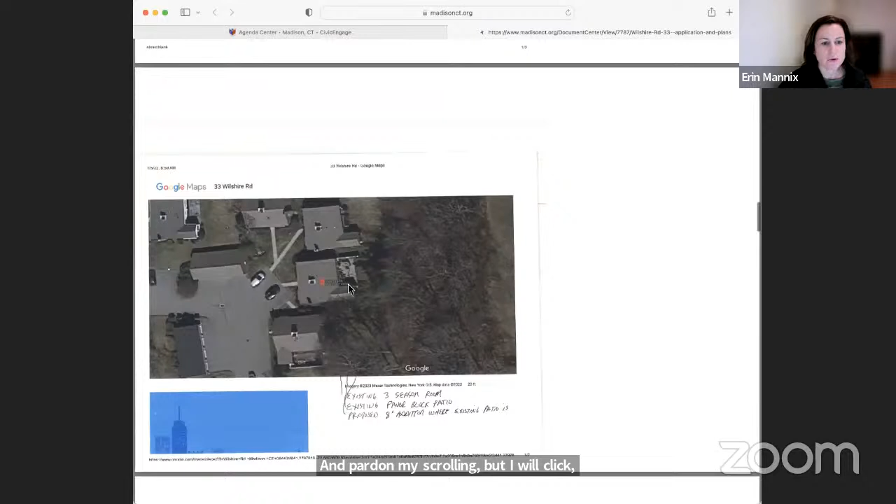This is number 33, which is at the end of the cul-de-sac. The existing rear of the building looks as such, and this is the subject space that's going to be expanded here over the existing patio. Here's the Google Maps that shows the expanded patio area and the existing 3-season room, and this is the addition that will come off the back. It'll be the same materials, same style windows, and that's pretty much it. No visible changes from the front elevation as it's located fully in the back of the property.

This also does require Inland Wetlands approval because it's a regulated activity adjacent to wetlands out in the back, so he's got to go before both agencies here. Any questions? This is kind of a no-brainer, I think. I don't have any questions. Does anybody else? No.

Matt, I'll make a motion to approve as presented. I second that. Any discussion? No. All in favor? Aye.

Okay, wonderful, Mike, that was easy and painless for you. Thank you very much. I'll hopefully talk to you tomorrow. And then hopefully as we update any zoning regulations, maybe we can come up with some language to avoid this process so they don't have to, especially for a rear addition, jump through hoops here for approval.

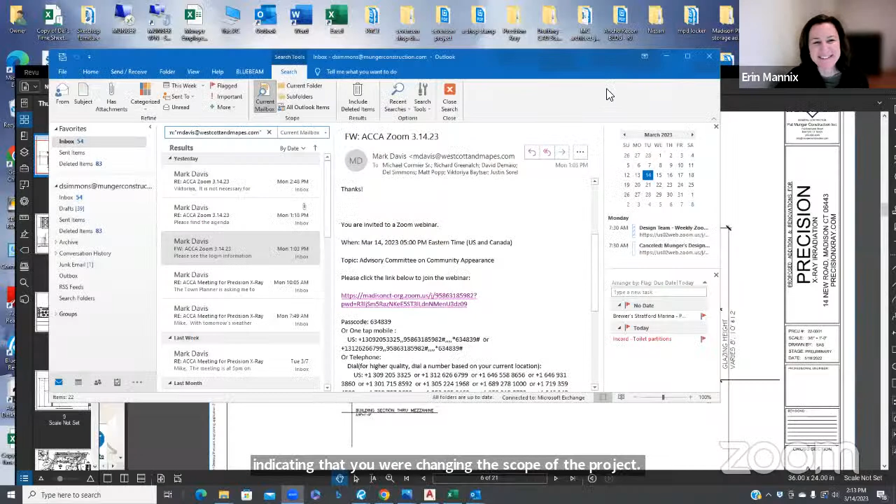So if you can give me the screen, Erin. You should have permission. Okay, good. And Del, I understand I received a voicemail from you indicating that you were changing the scope of the project. Somewhat, yes. Okay, so we're all seeing this for the first time. Okay, well let me get rid of this.

Okay, here we are. So as Mark said, we have a new technology building here that we're working on, where we've got the addition to the existing Garrity building. It's around a 4,000 square foot addition. The original plan was going to be a 2-story addition, as it's shown here. However, due to budget requirements, we knocked this whole upper section off, and we're going to go to a 1-story building. Can you mute us?

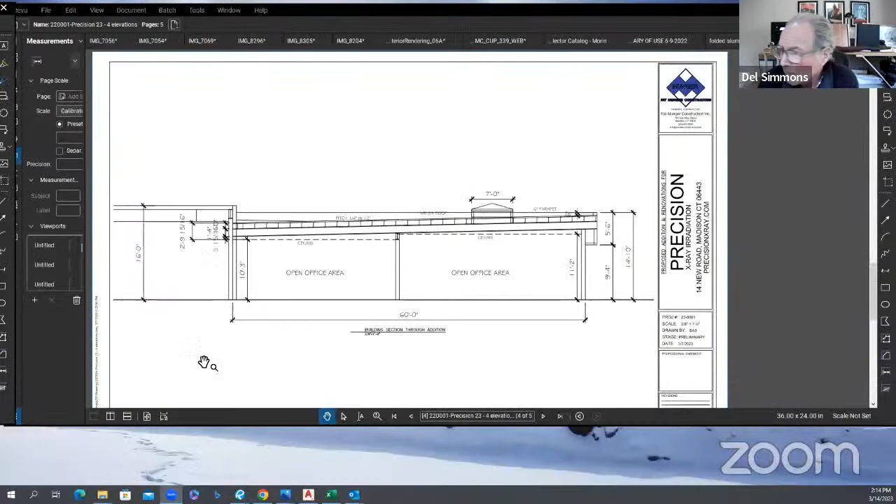So what I want to do is I want to share my other screen. And this is the new... There you are. So this is our new 1-story cross section. To bring you up to speed, this is what the building looks like right now. The front entrance, this is the north elevation.

As we walk around, this is an addition that was built by Munger Construction in 1998. We continue to walk around the building. This is the east side of the building. And you can see here that it really looks like an industrial building. So what we want to do is really upgrade this image. Here's the rear side again. And going around back to the west side, here we are.

So if you peek through the trees, New Road, as you know, as you head down New Road, there's quite a tree barrier between the road and the building. If you peek through, this is what you see. Here's the existing entry. Down here is the existing Munger addition, built in 1998. And then this is the additional piece of office building that's in the front. In the background, you can see the 2-story storage area.

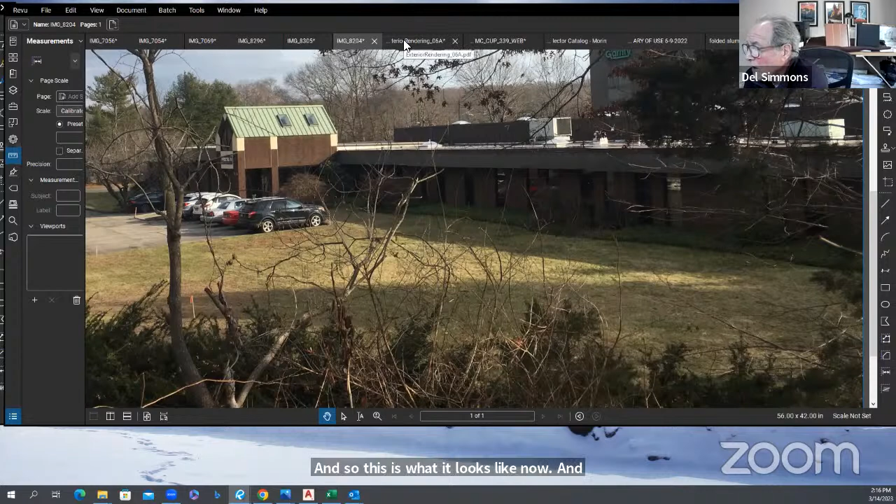And so this is what it looks like now, and this is what we want. This is the rendering of what it will look like. And what I want to say is everything that I marched around the back side, including this 2-story area here, is all going to receive new siding. So when this building is completed, every elevation will have new material, and there will be basically 3 materials, all coming from Morin Corporation out in Bristol, Connecticut.

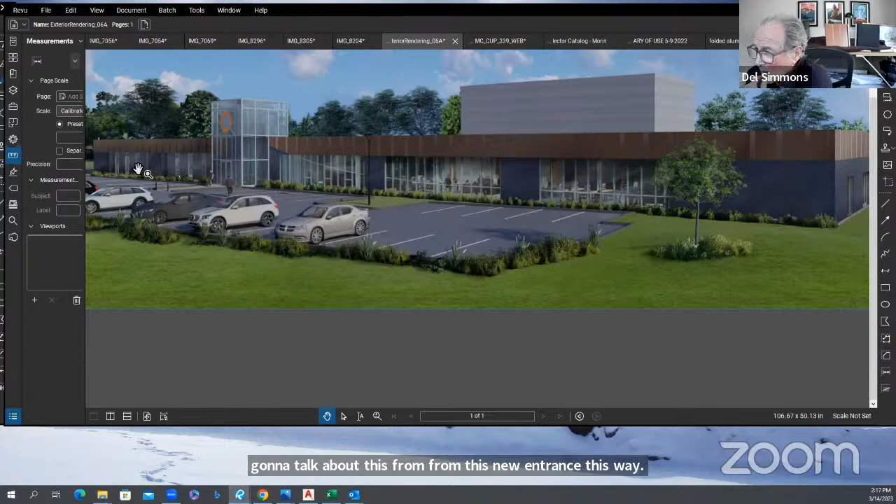And there are 3 types of siding. Now, from this new entrance this way, this is all an existing masonry building right now, brick, that's going to receive new siding. The existing windows are going to remain. The upper area, this soffit here, will replace the existing soffit that's there. And then that level will carry all the way across to the west end of the building.

Now, there are again 3 materials. One is a vertical metal siding. It's a rib, it's a 12-inch metal siding, and it looks like this.

You can see the rib shining there in the reflection. That's this area up and back, as well as this area over here on the side, around the existing building.

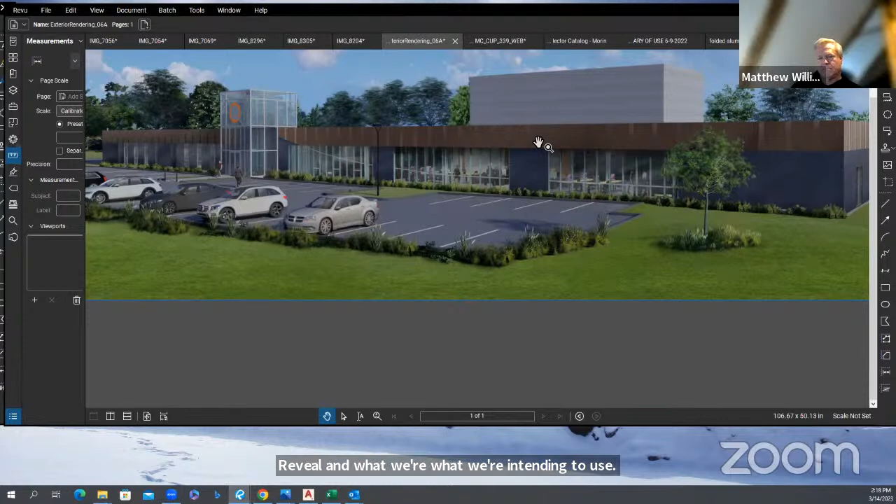Now, this material up here on the top is going to be a Bristol black. However, it changes from a 12-inch wide to an 8-inch wide with a 2-inch reveal. We intend to use two types of black called Bristol black, with a gloss and a matte finish. If I zoom in here, this is the matte, and this will be gloss, matte gloss.

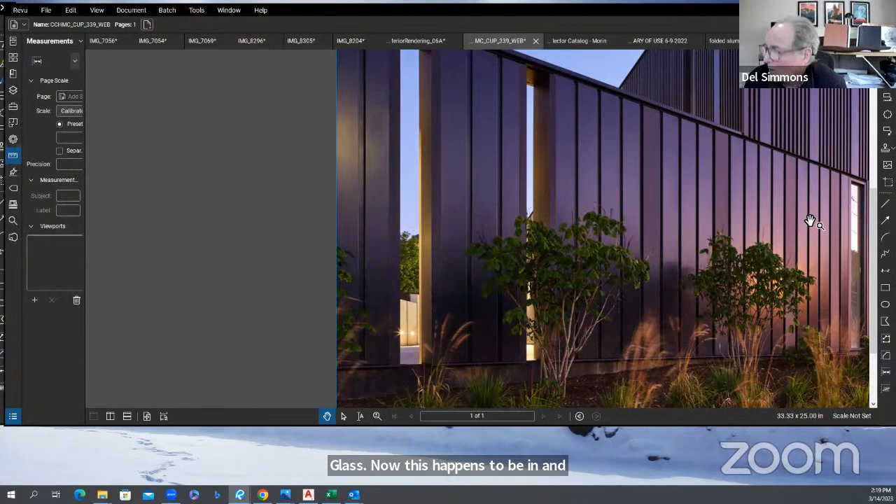Now I'll show you a photograph of a blow up of that same material, from an existing building that has it. You can see, here is the matte, here's the gloss, matte, gloss. This happens to be in an afternoon western exposure sunset, so it's got a bit of a glow to it. Our renderer also captured that same glow to show that it is in fact two tones of black, one gloss and one matte.

So that's that material. And this material right here, as you can see, is a horizontal panel. That horizontal panel is going to be made of an aluminum product, and there it is right there. It's a panel that has the edges bent back, a folded plate that has about an 1/8 of an inch gap between it and the next panel.

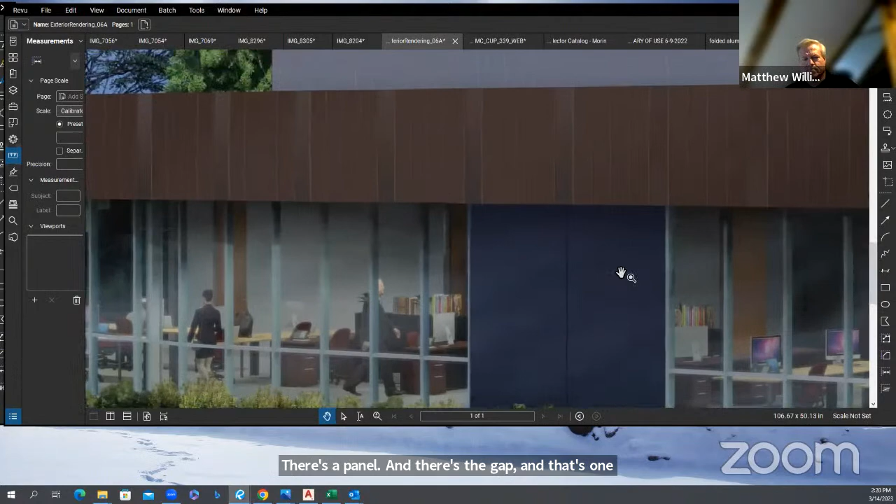So there you can see it. There's your gap, there's the panel, and there's the gap. That's one section, and that would be another section right there. So we have this one material, this material, and this material. Those are the three materials.

Now let's go to the colors we're talking about for the production area around the building. We all know that if you take a picture of a colored shot, everybody in this presentation probably sees a different color because your video cards are different. So we will be delivering panel materials to you, as well as a colored rendering. We can deliver it tomorrow so you can see the actual samples.

The samples are going to be, this is the Bristol black that's going to be in the matte and the gloss. I'll go back to the rendering again, that's this color. This color right here is called the dark bronze, and that is this color right here. And then the third color is the zinc gray. Going back to my rendering again, that's this color right here, and this color up here.

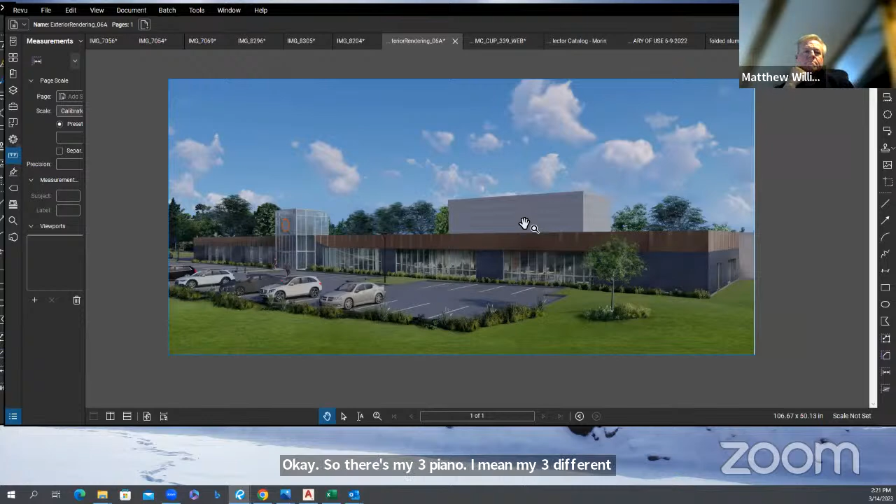Okay, so there's my three different materials. The soffit is aluminum. The gray, the zinc gray, is a galvalume. And these pieces right here are aluminum. And then they all have a finish, a painted finish.

So we did the colors, and now these are the actual panels. This is the MX6, this one that I held up here. This is going to be at the production area. This is the wrong color, this is not, this is going to be the gray. And the color that you're seeing on your screen is also the wrong color.

This is the right color. Jeremy Blackshear. I'm a popular guy today.

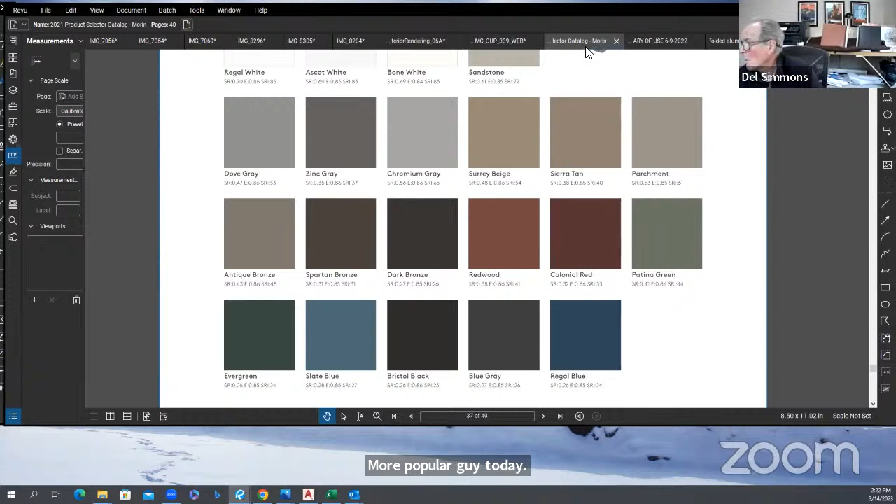Okay, so let's see, we've got our colors, we've got our panels. This one right here is the MX6 for the rear of the building. This is the soffit, which is an MX8, and it's a 10-inch with a 2-inch reveal. And then this one right here is the one that's folded. This MX6 is also one that is used, this aluminum, it will be folded to create this panel right here.

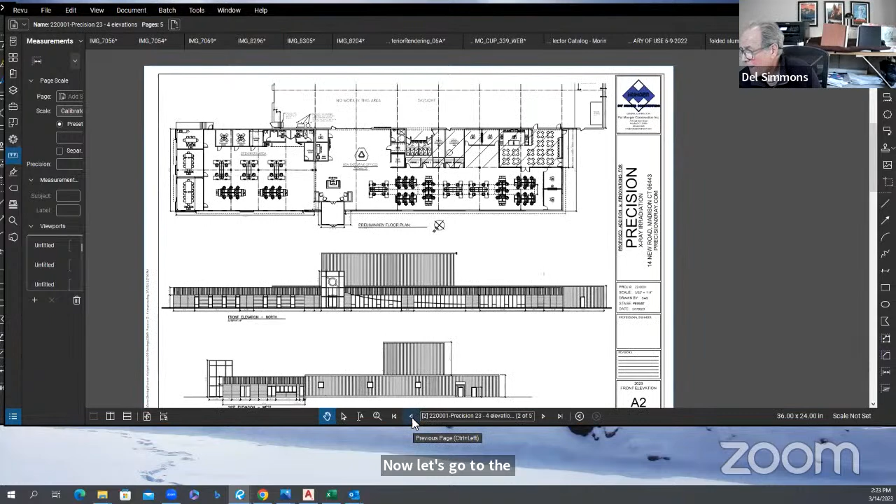Now, let's go to the elevations. So here we are, this is a one-story building. This is the existing Munger building that will be renovated, fully renovated, with the exception—well, it'll be gutted, and the windows will be kept. It will be new siding, and we'll have a new soffit all the way across. This one story right here shows the open office floor area.

This is an existing portion of the building that will remain. There's a new cafe here, and these are offices and offices. This is the large production area behind, which is not a part of the project except for siding. And this is the elevation that you saw there.

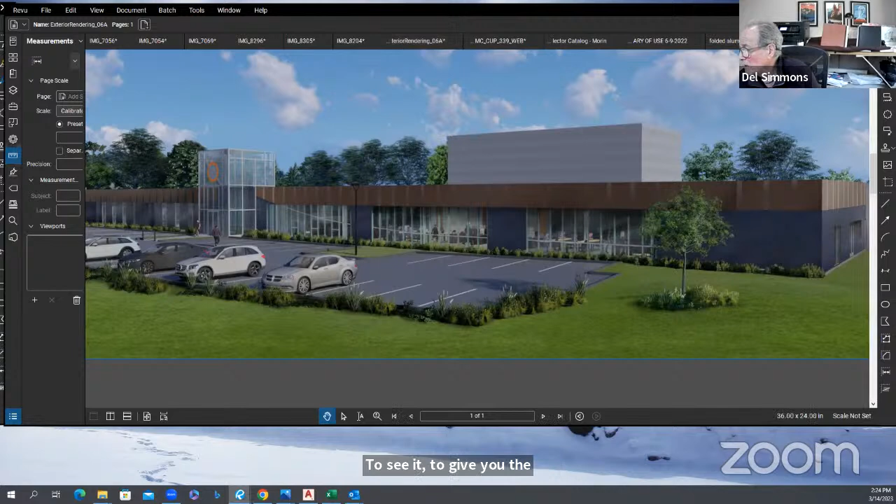So let's take a look here to give you the benefit of the rendering, which really tells it all, and gives you the closest approximation to the actual building. So there's our elevation. This is the west side. This is all the new siding that we talked about. This is all going to be glass, by the way—the entrance is all going to be glass. And this shows the west side, where that cafe is.

This is the east side. This is the back side. All these loading dock doors will be replaced.

This whole area has new siding. This is the south side of the existing building. And this is the rear of the existing Munger construction building, which will have new siding as well.

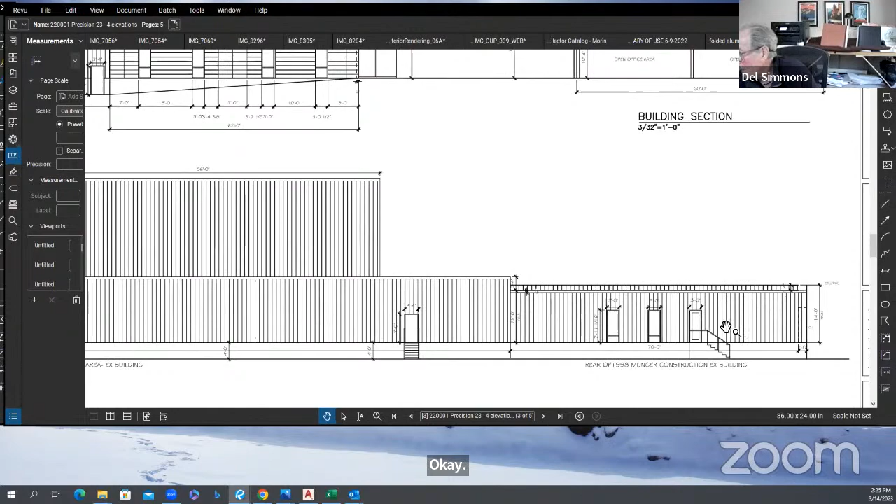And this is the west side, the east side of the one-story building, the one-story existing Munger building.

So, as far as appearance goes, those are the components. Let's go back here, bring it to this point, and then I can answer questions that you may have.

So Del, can you hear me? Yes. I have a question.

The colors that you showed are primarily gray and black. Is that the way you perceive it? They are.

Let's go back to them, Ron, and look at them together. Our colors - you will have a sample of this. This is a dark bronze. So this is a gray, and this is black. So you have black, gray, and dark bronze.

So the bronze, I guess my question is, do you feel that there's enough contrast between the bronze and the black?

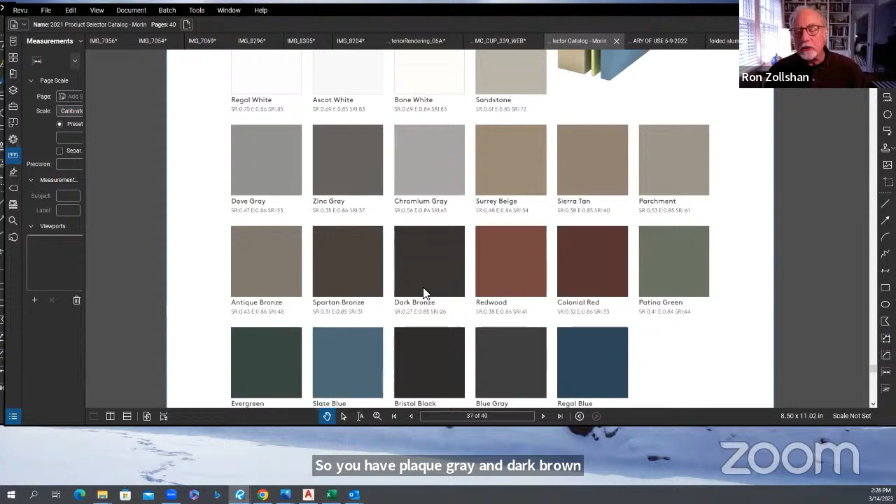Let's have a look here. And there it is, really. That's a bad example, isn't it? I think, Ron, when you have the actual samples in your hand, you'll see that there's a better contrast than what you have. Okay, great.

Yeah, and you will have those tomorrow in your hand. It's really hard for me to do that because... okay, yeah, I guess on the screen it's hard to tell.

So Del, I have a question. Sure. Hi, by the way. Hi. You can't see me - my computer won't allow me to visit by image, so I'm here anyway. Good to hear you, Peter.

Okay, so I'm looking at Google Earth, and I can see the black roof, which is the main manufacturer. There's the thing poking forward that's going to be glass, and to the east is that '98 addition. To the west, there are three pieces of white that don't go all the way to the edge of the building. Is that something that's going to be torn down?

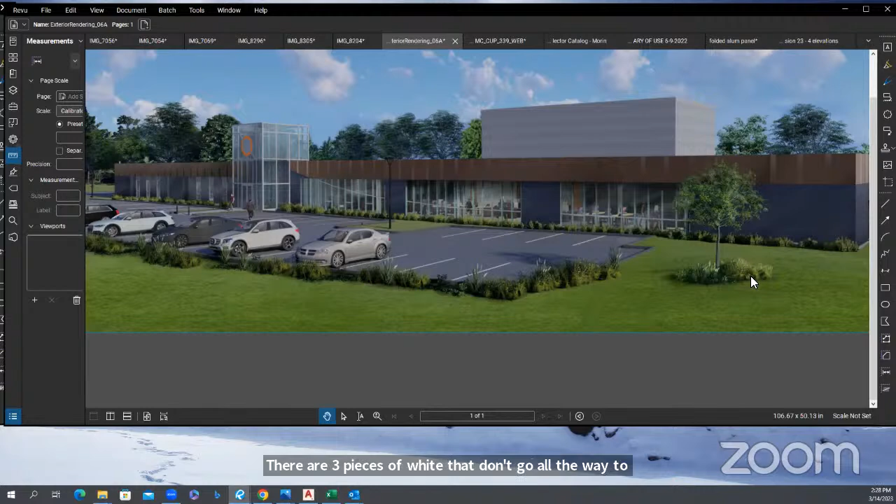I'm not sure exactly what you're looking at. Right now, if I go back to this, this building is being expanded. Yeah, the building is being expanded, from here to here.

Let's see, if I go to the floor plan, I could probably show it the best. Yeah, I was looking at it earlier, but I can't look at it at the same time. Let me go back to the floor plan and we'll go over it. That would help. Yep, hang on.

Yeah, here. So if I put a highlighter on this, from here across here like this and to about here - this whole area in here is really the limit of the addition.

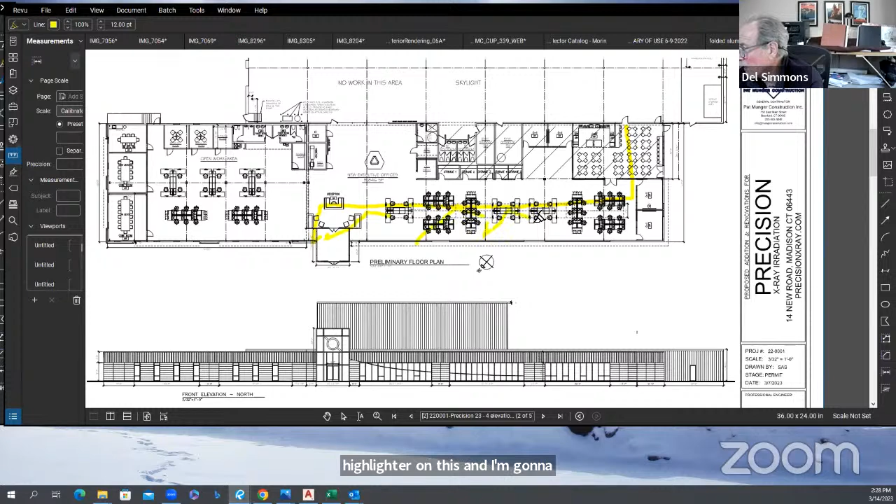Okay, so I think you were referencing something over here on this end. Well, there is something on the ground, a square thing, I don't know what it is, to the right of your drawing. So all I needed to know is the addition is going to stop short and the old building runs past and then moves south.

Yeah, you know what I can do - the drawings, let me switch over to this other screen again. Here. Yeah, there. Come on, there we go.

If I can just jump in for a minute, Peter, I have the same question, and I think it comes down to - it looks like the new fascia getting that Bristol black panel is all in one plane because the addition comes out and basically creates one front plane of the building. Is that accurate?

Yeah, now can you see the north facade there? Yeah. I don't see the entrance canopy. The glass canopy is not showing. Is that just that little bump at the east end? Have you got the site plan up on your screen?

Okay, yeah, I can see yours. I've got yours up there. Now I get it, it shows it. All those bumps go away.

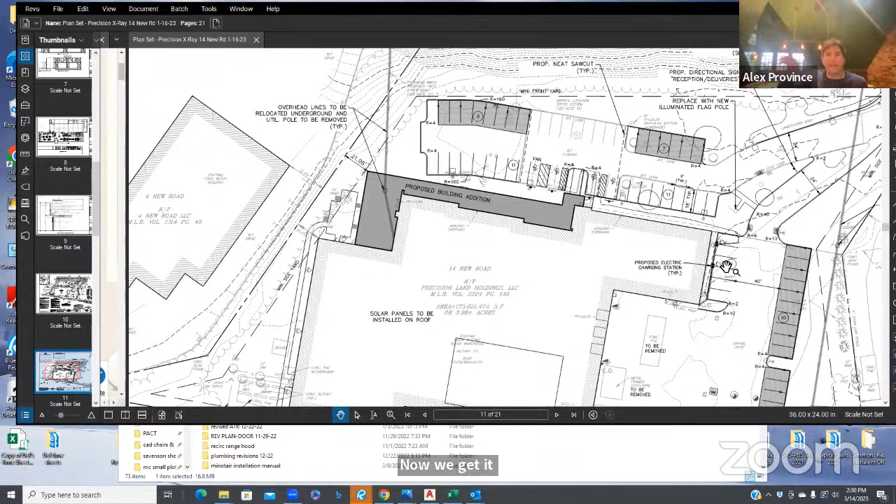This front piece projects across to here like that. Now it looks like the rendering. But the rest of the building still gets sided to match the proposed new addition, correct?

Yes, it does, Alex. And does the sign that would face the railroad track, is that still included? As of this point, yes.

Thank you. Matt, so if I can ask a question, you had said that there existing windows, but it looks like you're going to have new storefront to the right of that new entry and perhaps old storefront or windows to the left. And my second question is, what is the color of the windows?

It's clear, Matt. Clear anodized? That's what the rendering kind of depicts, a clear anodized look. Yes, it would be clear anodized.

Matt, John Cunningham, can I ask you a question? Does anyone else think the main entranceway is a tad bit out of scale, or is it just me? It looks like it's a little bit too big.

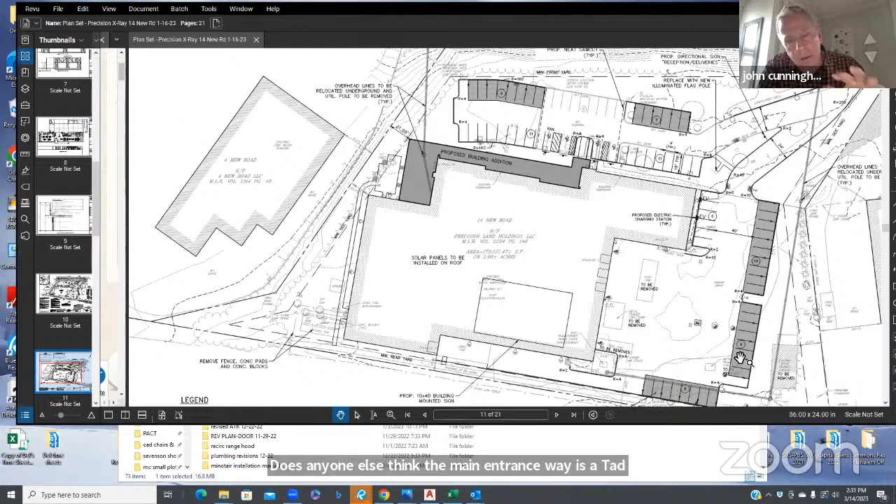I'd have to look at the elevation again, I can't tell from the plan. Let me go back to the other screen so you can have a look. Not that it's a big deal, I just wonder what everyone else thought of the entranceway.

Do you want to know what I think, John? Yeah. I think it fits, I think it works.

But here, let's have a look at the rendering because that gives you a little bit more scale on it. So none of that is existing now, right?

Well, look, there's a bump, here's the existing building. Yeah, that thing is still there, but not as big as that. That kind of leads the way to this form. Square this form off, and you're quite similar in size actually to that.

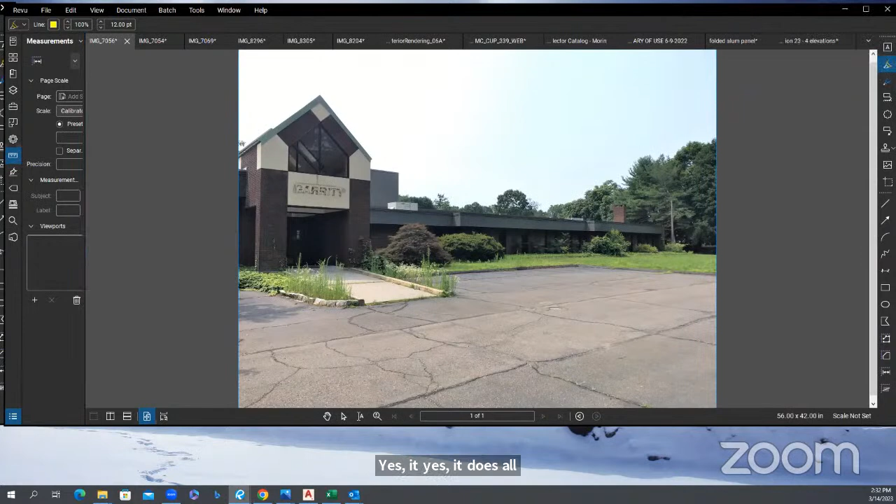Does it grow toward us though in the picture? Does the tower get bigger? Yes, it does. Wait a second, let me have you look at this site plan here.

The building actually projects forward. See how this thing is all hollow here? This whole section is the new building, it will come right to this plane right here, Peter.

Right there. And then the glass comes toward the camera? No, that's the face of it. That's the face limit. Let's go back to here. That would be this face right here.

Okay, so that's all new. Yeah, this is all new. Is it from here? Here is existing, with new soffit and new material siding, and existing windows.

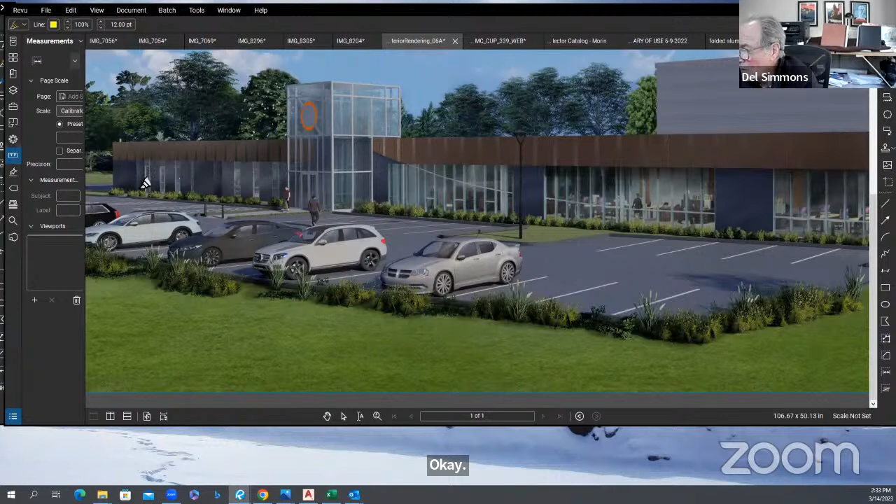And then over here, from here forward, this is all new in the front, all new in the front. And a lot of this existing building will be demoed as well. It's not keeping the existing material.

It keeps, there is one portion. Let me go back, here we are. This portion right in here, I'm going to change color so you can see what this is. This section right in here, see it says existing sprinkler room?

This is existing, because that's my sprinkler room, we're not tearing that out. And this is a series of existing restrooms.

So this area, with the exception of this area from here this way, this will be all demoed inside, with the exception of this. So we'll obviously have to keep roof over this, keep this all up and running while we do the demo out here. This is our joint right here.

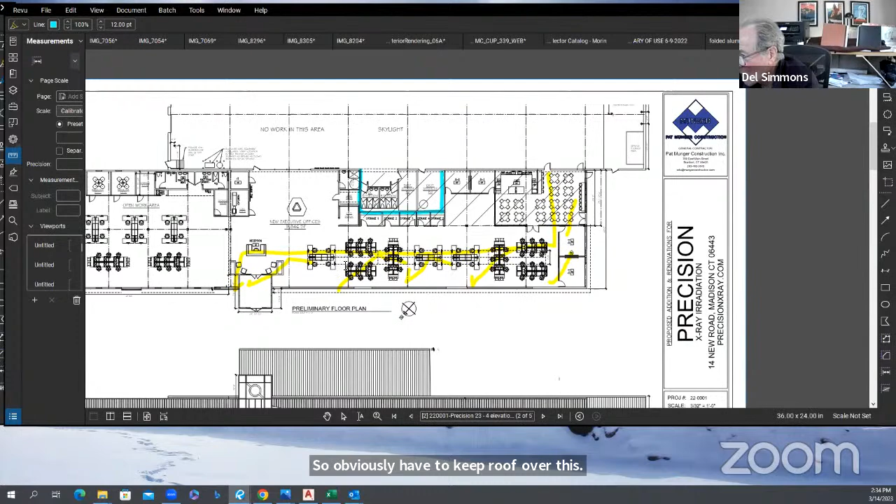That right there. Whoops, oh well. Trying to get fancy.

Yeah, so this is the line. This is the demarcation of the two.

Let's go back here again, give you the overall view. So it's a whole new building, and the front is filled in as if it were filled in from the old building. That whole section on the right is new.

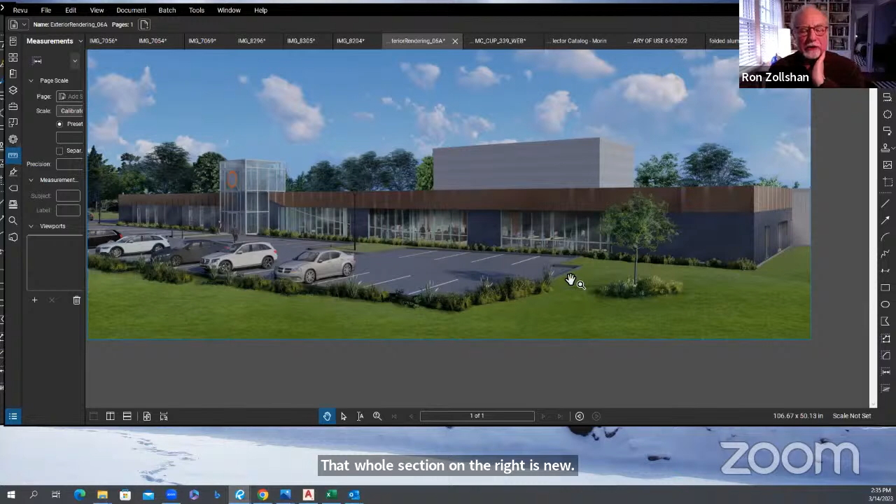Ron, what we wanted to do is we wanted to get this plane and extend it through, and then square it off. Right, yeah. You're not just gutting the inside of that building to the right, you're tearing it down except for the restrooms and the sprinkler room.

Exactly, yep, you got it. And building a new building to fit the plane of the building on the left.

Exactly, and also to give it that new look. We really want to do this because the other building is so industrial and so aged that we were looking for a complete new look.

The product they make, these x-rays, this is going to be a place where these x-rays are displayed. If I go back to my floor plan, this whole area right here is a kiosk, and this is where x-rays will be displayed. This whole area opens up with a glass wall into the production area, to try to make that relationship between the interior and this new space. It's going to be like an open showroom, like an automobile showroom, but except for x-rays.

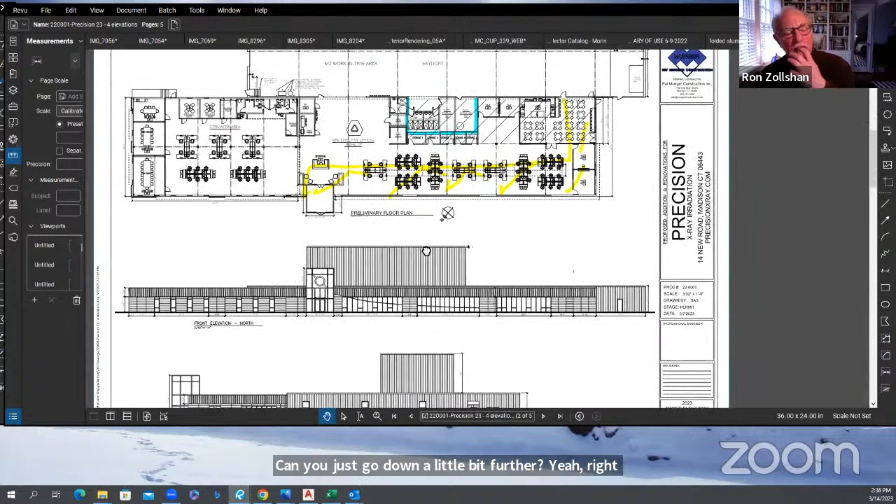To John Cunningham's question, can you go down a little bit further? So the existing entryway, is it larger or smaller than the new one in depth? In depth, from front to back, it's the same plane. From here to the back, this point to the back, is the same.

This is where it starts. That's where the old one started too. Exactly. Now if you want me to, let me switch and I can show you that. Let me switch over. This is an important point, I think, for us all to see.

Share screen. Share. There. Now, can you see this here?

Just to piggyback on what Ron just asked a few moments ago. Are you sure the Bristol black isn't the bronze, and the bronze the Bristol black? Was that a word switch, or are we looking at Bristol black and it's just reading as red?

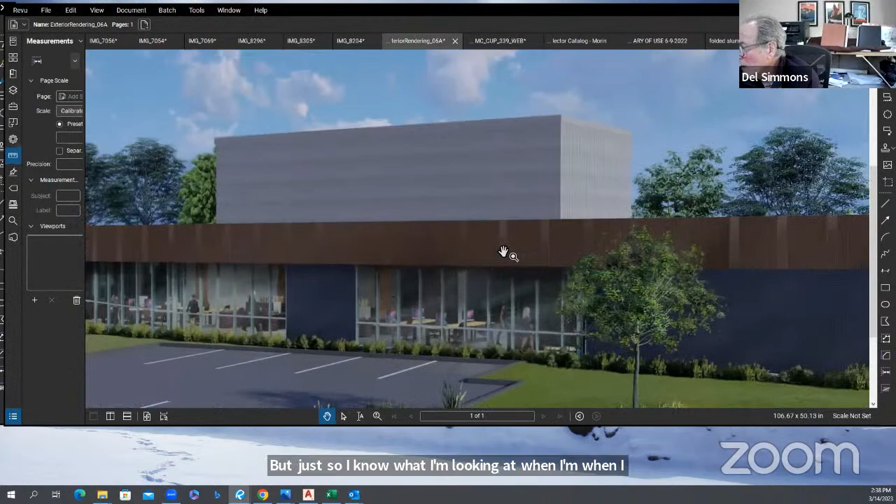If you look at this, this is the Bristol black. However, the reason we chose this Bristol black is that it becomes, let's call it a chameleon in the sunlight. It's highly reflective, and there you can see it picks up the afternoon sunlight. Look at it across there.

So again, you will have these things delivered to you. You can have a look at the actual color.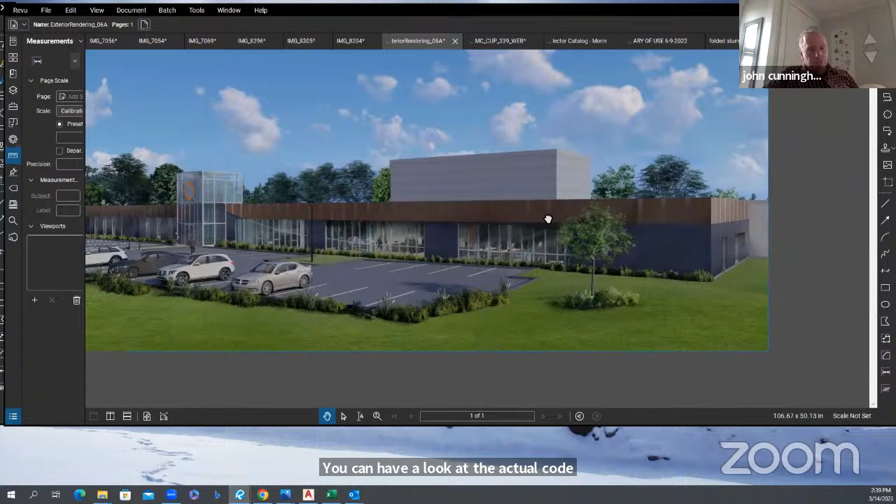Yeah, so let's go back to those again, Peter. So if you could label the samples, that would be useful. The actual samples do have exactly that on them. They do, yep.

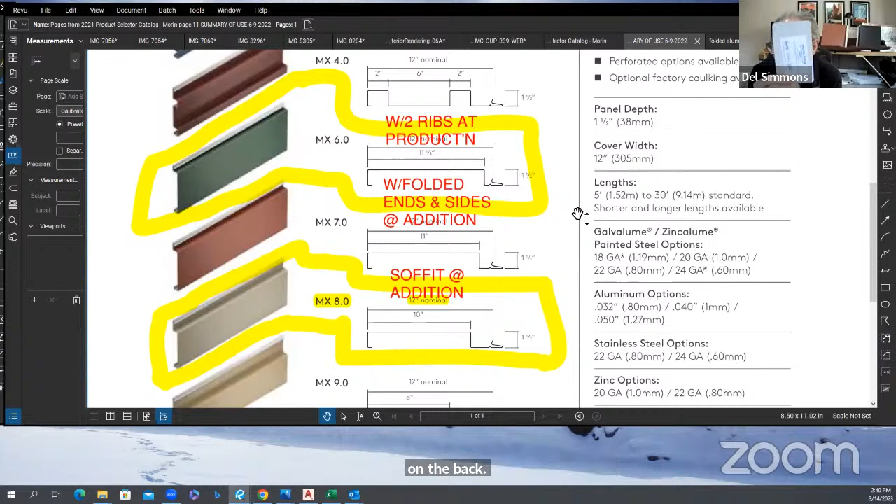There are some samples that are 4 inches by 5 inches. This typical type of sample, like I'm holding up here, has the color and has the label on the back. That's what you're going to be getting. Two for the black, one you will see is reflective, one is matte, and then you'll get the zinc gray and the dark bronze. Both of those are labeled as well.

Mr. Chair, do they come back for lighting and signage at a later date?

If there are modifications, I think Aaron could answer that better than I could. But before we go on to anything else, I have a couple of questions. Can you go back to that site or floor plan? Can you give us the dimensions and plan of that new entry structure?

Sure. So how wide is it? Roughly 17 feet that way, and 17 feet that way. It's a square. And how tall is it? The height is 26 foot 9 inches.

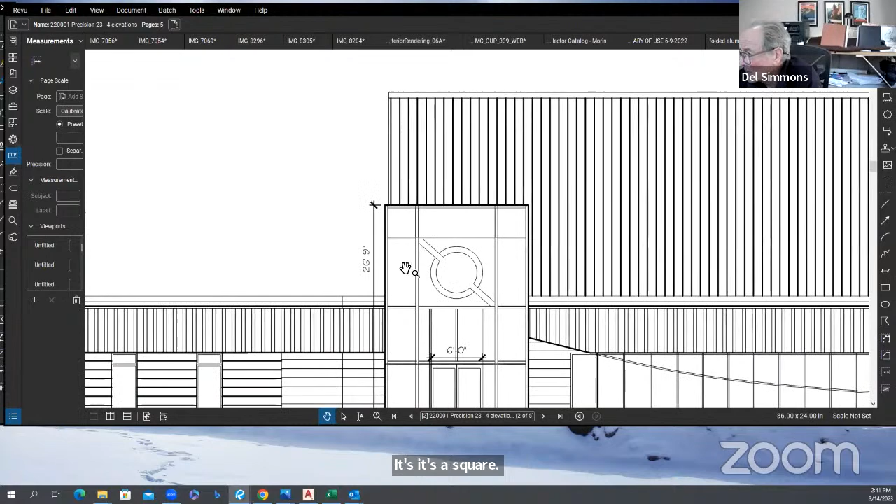Okay, and in your rendering, the part above the flat roof looks translucent, transparent, like you can see through it. Is that the way you intend to do that? That's accurate, yes. Will there be lighting in there?

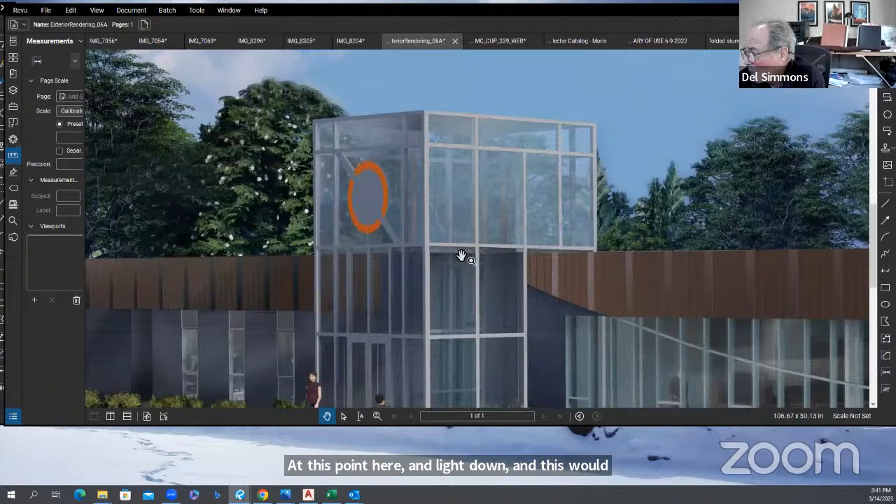Yes, there will. It's not 100% resolved, but we were planning on putting a light level at this point, with light down and up. This would be illuminated at night, but we'll have a ceiling height at this point, so it's not one volume up and over top. It will be separated.

That seems to me like an important element. Yeah, it is a very important element. That's the branding of the facility. I think because that interior lighting is part of your exterior projection of the building, you probably need to give us some specifics. I'm sure planning and zoning will want to know what that light level is and when it'll be on, so that's a question you should anticipate.

So to get back to John's question about proportion of that structure, I don't think that it's a concern, since it's a large building set back far from the street. If you go back and look at the elevation, it's kind of a minor feature of this very long facade. So I don't think it's a huge deal.

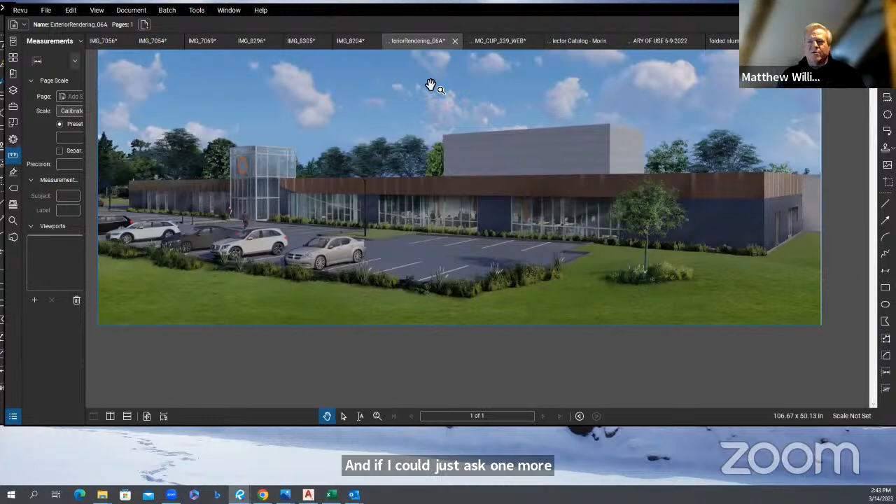If I could ask one more question, can you go back to that site plan for a minute, where it showed the original structure versus the new structure? That gives us some relation, and a look at the relationship. This is actually longer than what we'll have, but if you flip back and forth between these two, and go to that site plan, I just want to look at that footprint for a second.

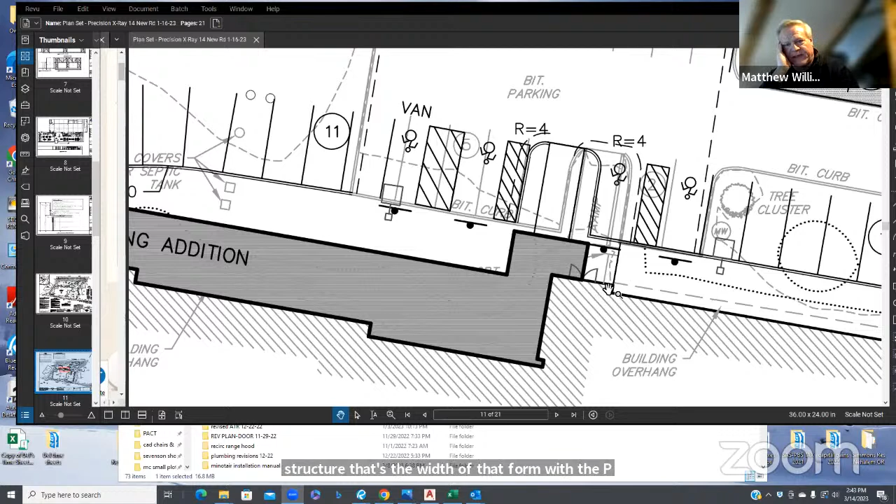I just have to ask a question. So when I see those entry doors, what I think are the original entry doors—that's the width of that form with the pediment on it now, correct? From there to there, and from there to where your hatching starts, that's it, because it'll give us a sense of how big this new thing is. Here it is, Mike, that's the original, right?

If you look underneath, see this line here? Here is one pilaster, here's the other pilaster, so it goes there, there, and there. I understand. But the part that's hatched in that solid gray is the new, that's the width, the 17-foot front we're looking at, right? Yes, it is. So the interface with the parking lot—okay, now I think I see the entry walkway, which is centered on that. Okay, that was my question.

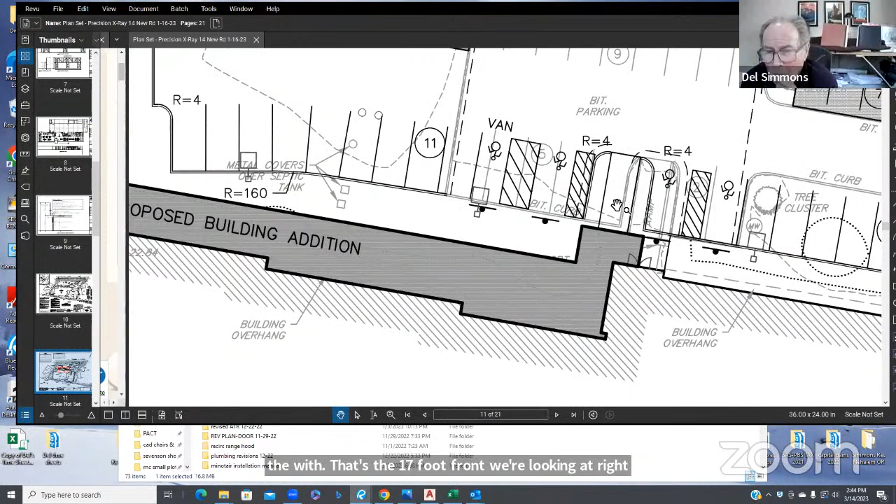Yeah, it's a little bit confusing. Yeah, no, it's fine. So it's really not, it's a little broader than the original one, but I don't know, I don't find that to be a big issue. I don't know how anybody else feels about it, but I don't either. I think it's a nice feature. I think it sends a message that it's high tech or something cool. Yeah, it's also down in ground.

Victoria will be happy to hear that. It's below grade. I mean, the roadway is up, so it probably has to reach up a little bit to get your attention. Good point. It is in a bit of a hollow.

I think it's a nice solution to a relatively ugly building. Thank you, Ron. Thank you.

My only concern would be the neighbors to the south. I'd be curious to see how it glows and what it's going to be seen from your neighbors on the other side of the train track. A big white glowing cube might not be all that, might be a little eerie.

We'll never see it. The road is elevated there, so you won't see it. You've got that big two-story piece that'll block it. Look at it, it's like a giant screen up there.

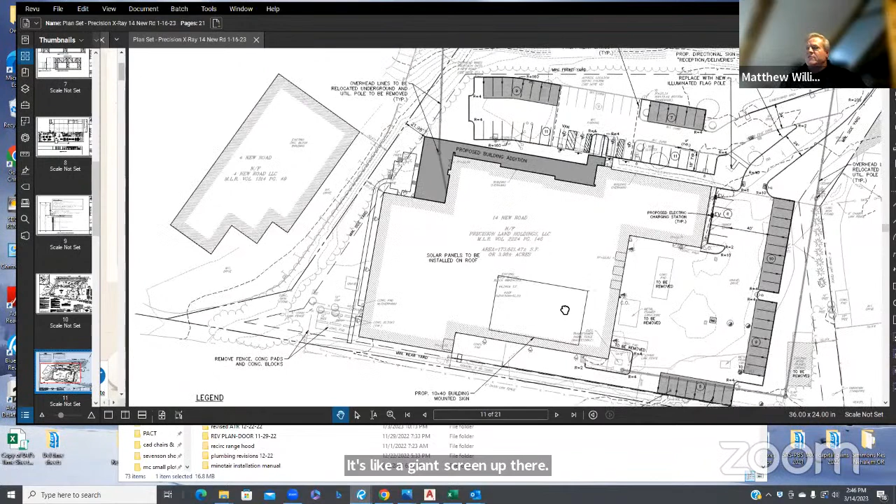I would think that from New Road would be where I'd be interested, but I looked on Google Street View and it looks like there was almost a berm put in there, maybe way back when the original building was done. I can't even get a glimpse of it from Street View anywhere along there. In fact, I drive New Road almost every day and I've never noticed this building. You have to actually stop, get out, and look through the woods to see it.

So I think that lit clerestory above, that's something the neighbors might notice from across New Road, depending on its height and when it's on. I think that will be an important question to answer. You're good, we'll have a good answer for that.

Are there other site items, I see you have parking lot expansion, looks like, and is there site lighting and landscaping that you're going to present? To present now, or... I don't know where we're at with this.

If you have questions, Mark is here, and I can scoot through these drawings and Mark could answer your questions. Now, which screen are we on?

That might be good, unless there's anything else, Del, that you have to tell us about the building design. I think we understand it. Is that correct, everybody? Yep.

Then Matt, do you need me to stop sharing and you take it over? Maybe just keep this one up for a second. Good evening, I'm Matthew Popp, landscape architect from Environmental Land Solutions.

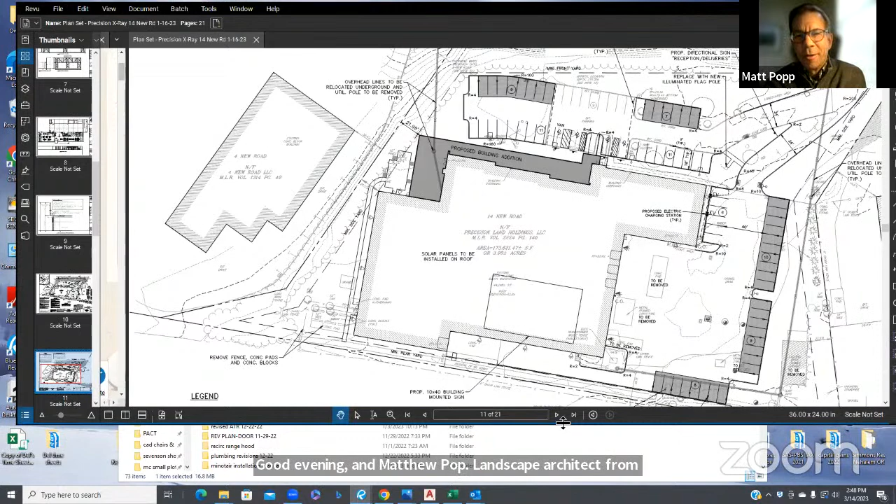We're out of Norwalk. The one thing I want to point out on this drawing, you can see the five shaded areas on the outside of the parking lot. Those are raised carports with solar panels above them, so that limits the landscaping around the parking lot. And right in front of the two carports near the front of the building, there's a septic system there, so that also goes underneath, that's also where we couldn't put trees.

Now I could start sharing my screen, I could put up the landscape plan. Okay, I will stop, you've got it, Matt.

I'm hoping you can see it. So again, that septic system is right through here, the carport. Could you zoom in a little bit, please? More. Wait one second.

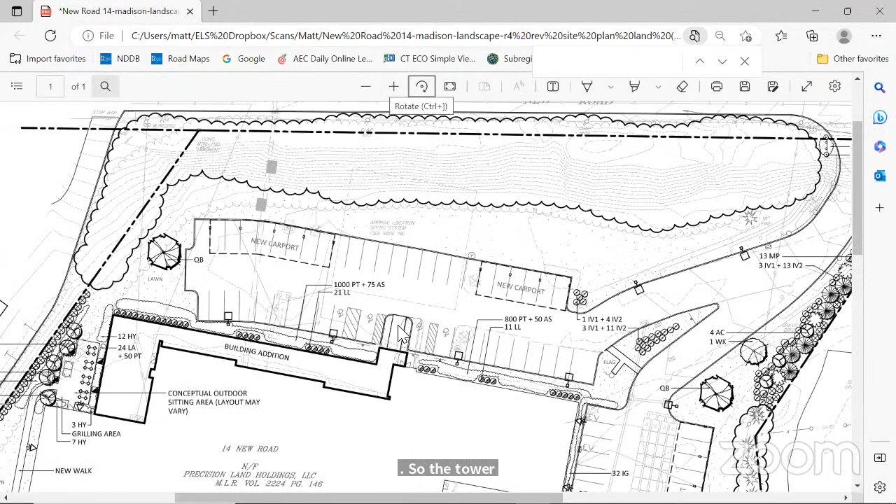So the tower looks quite small when you get to the plan. The septic system, approximate location, is right through here. We have the one carport here, second one over here, and then on the side the third, and then the fourth, and then the fifth over here. So that limits the area where we could put in trees.

Normally I kind of line the parking lots with trees, but what we did do is we have a new driveway coming in off New Road, the existing driveway comes through here. So when you come into the site, we heavily screened our neighbor with evergreen trees, mainly Norway spruce, arborvitae, and American holly. And in front of that we have bayberry and winterberry shrubs, so it's pretty thick screening to the neighbor.

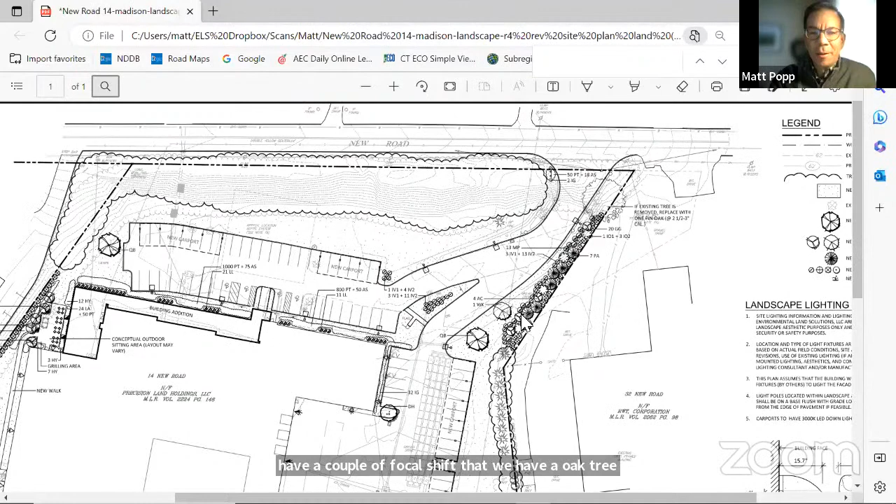We do have a couple of focal trees, an oak tree here, and on the other side of the parking lot another oak tree. In the front of the building, let me zoom in, we kept it very clean. Where there's no windows we had shrubs, hydrangeas, and where there were windows, which go pretty low, we just had Pachysandra with an astilbe, which is a white, low flowering ground cover.

To the side, we have an outdoor sitting area. Let me just zoom over.

Right through here we have a birch tree. We had shade below surrounding it, the sitting area here. Just a couple of tables, probably a small grill over here, and a walkway that wraps around the building.

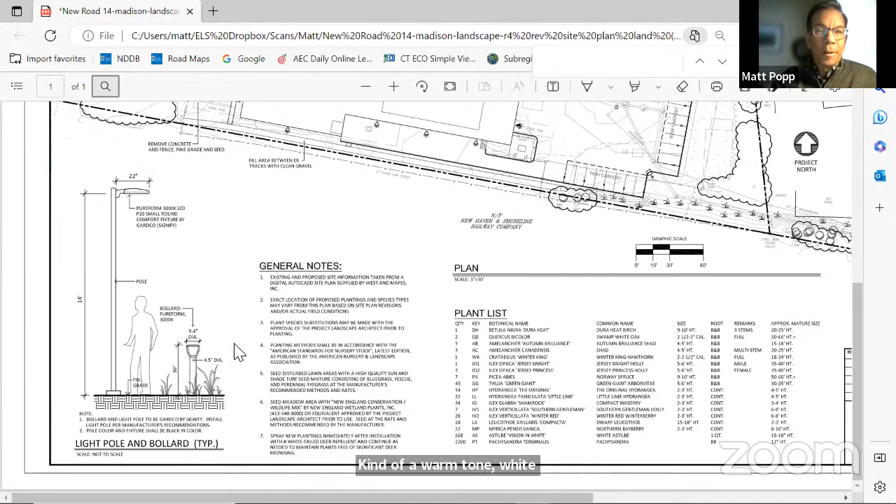For lighting, we have a 14-foot high light pole, 3000 K, a warm tone white fixture, with a matching bollard. The bollards are around the sitting area here.

The pole lights are located here: 1, 2, 3, 4. Those shine out from the building and across the parking lot. We have some on this side of the parking lot here, shining back in towards the building.

And then on the building we have wall mounted fixtures, 1, 2, 3, 4. There's a number of them wrapping around, and there's a detail of that wall mounted fixture right over here.

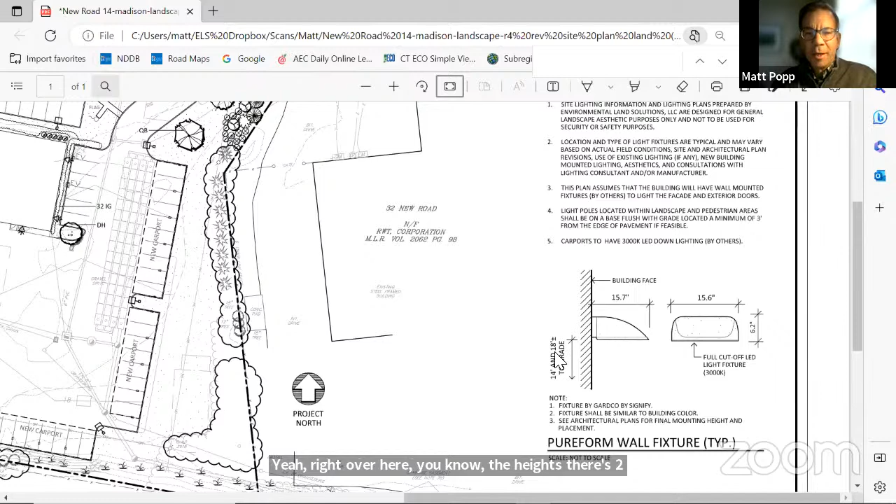The heights, there are two different heights on them. One's 14 feet plus or minus, and another is 18 feet. The 18-foot height is used where we have the loading area, since it's a pretty big distance for the light to go across, so those are up higher. Again, there's still that warm 3000 K fixture, all downward pointing lights.

So I think that is the landscaping plan, quickly, if there's any questions. One other thing we want to point out, there's an existing flagpole here, so I didn't want to stick any trees blocking that flagpole coming in. We have to keep that as a focal point.

Good to me, Matt. Okay. We still got those existing trees up in the front, it's a good buffer. Over on the side right here, the neighbor's parking area gets pretty close to the property line, so we want to screen that off from our outdoor sitting area.

Matt, are there lights under the carports? There will be, that's still to be determined, because from the light poles I don't think I'd be able to light underneath the carports. The reason I have the lights on this side is because I'm thinking they would shine out and maybe under the carport.

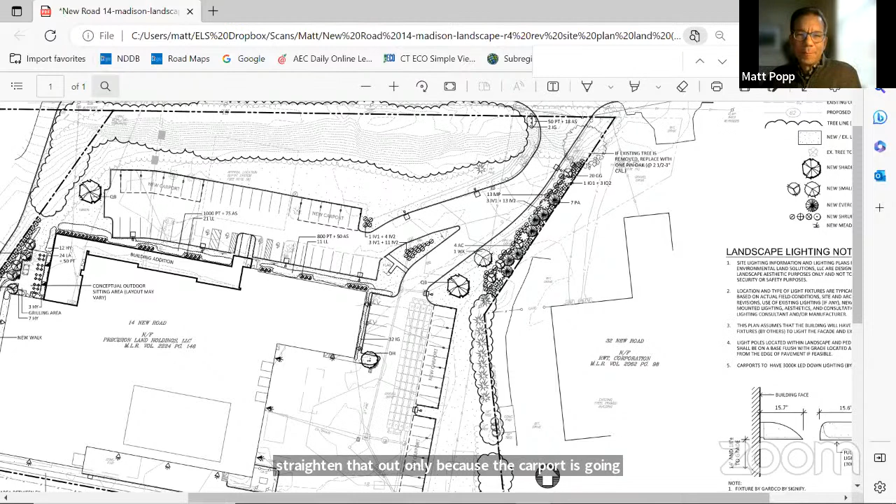That was my concern too. I think when I first saw the site plan, your eye goes right to that. But I think there's a building setback issue over there. Yes, that was the reason for that.

Right, you can't build right on the setback, Matt. Yeah, but you can build a retaining wall in the setback up to about 4 feet - does that sound right, Aaron? If you had to do just a little wall to make the grade work, it kind of looks like it's tipping its hat to the existing contours, but not so much the setback. Yeah, I don't know, I believe we have the setbacks drawn on.

Not on this plan. Yeah, we probably have that on Mark's civil drawings.

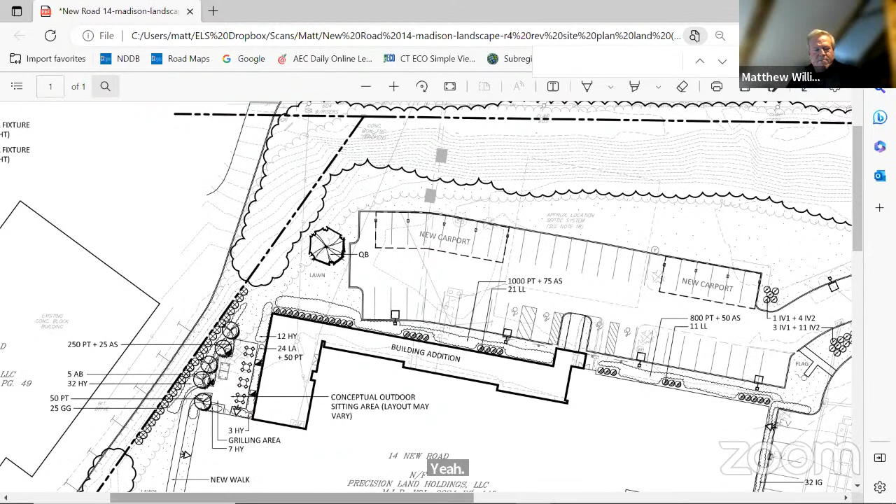Right, and that's the reason the bend is there, is because that front setback. We're asking for the waiver for the front yard, but in that area we're at the setback at that point. It's not a grading issue so much—we could grade it without a retaining wall and get that to work. It's the setback that somebody has to deal with.

So what setback? The parking isn't typically subject to setbacks generally, so I just want to know what's driving that. There is language in the regulations regarding parking in the front setback in this zone. Oh, in the front setback, in this zone, okay. I'm not familiar with this zone.

I have to pull up a specific section. I know Mark and I have gone over this quite a few times, and every time I forget what section it is that we're referencing, but I know it's in there.

Is it the kind of thing that P&Z can exercise some discretion on or not? Erin, do you know? For parking, yes—but now you're proposing a solar structure, which would have to meet the minimum setback. Oh, of course, you're right. I'm sorry, I completely forgot about the structure.

Does the carport structure count as coverage? Yeah, I believe it would. I don't know how close it is to the limit, but there's a lot of new roof out there. Let me look at the plan. I believe it would count for coverage, although I don't believe it's specifically in our regulations.

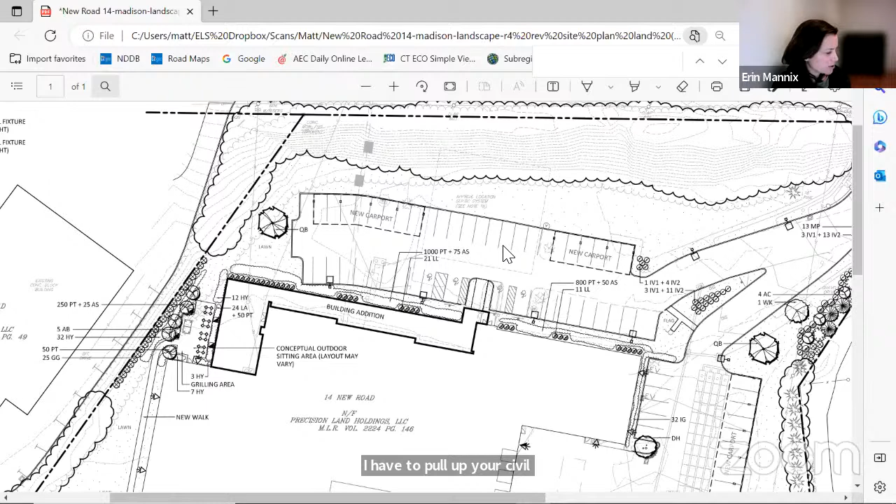Well, it looks like a really nice, neat plan. And if the carport on the left had the same number of parking spaces—I think it's 6—as the one on the right, and those two were framing the entry, that would be a really nice, neat, complete thing instead of the extra carport to the west, which gives you more coverage but loses that symmetry. Unfortunately I get in trouble because I always start to veer toward aesthetics away from some of the environmental initiatives other people think are important.

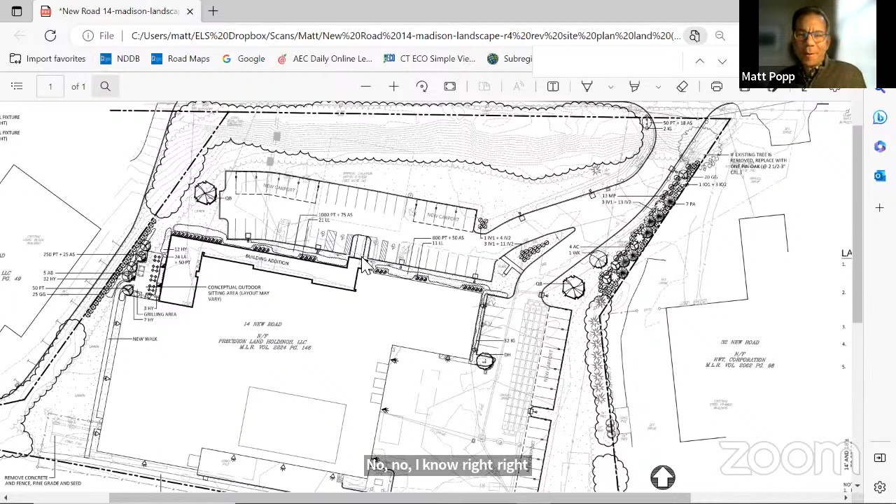But it's just a comment, I don't want to belabor it, I just wanted to ask. Well, and of course with the berm and the heavy woods there, you kind of don't see it. Unless you're looking from the top down. Right. So luckily it's on the far side of the parking lot. Mark, you want me to stop sharing or?

Does anybody else have any other questions for Matt on the landscape plan? Nope, looks good, man. Great, thank you.

I guess one of the questions, Matt, Williams and committee, would be if you'd like to hold off. This application has some revisions going forward and will not be moving forward with Planning and Zoning Commission this month. Is this something you want to give yourselves a month to look at the samples and continue onto your agenda next time, or are you comfortable making a motion this evening? You do have time—this application is also subject to inland wetlands, so the earliest Planning and Zoning Commission could act would be the April 20th meeting.

Well, I thought maybe I should just take that time. Yeah, I would take that. My recommendation would be to take that time. Yeah, I would agree with Ron. I think I was just going to ask everybody.

I mean, one question I had is just the variety of color with the dark bronze, the black, the matte black, glossy black—which I think is kind of a neat effect, I don't have a problem with it, I think that's interesting. But dark bronze and black can look very similar. Right, that was my concern originally. And the clear anodized will be a very bold element, which I don't think is a bad thing, I just wondered if you needed all three of those varieties in that area, but I didn't know if anybody else had thoughts on that.

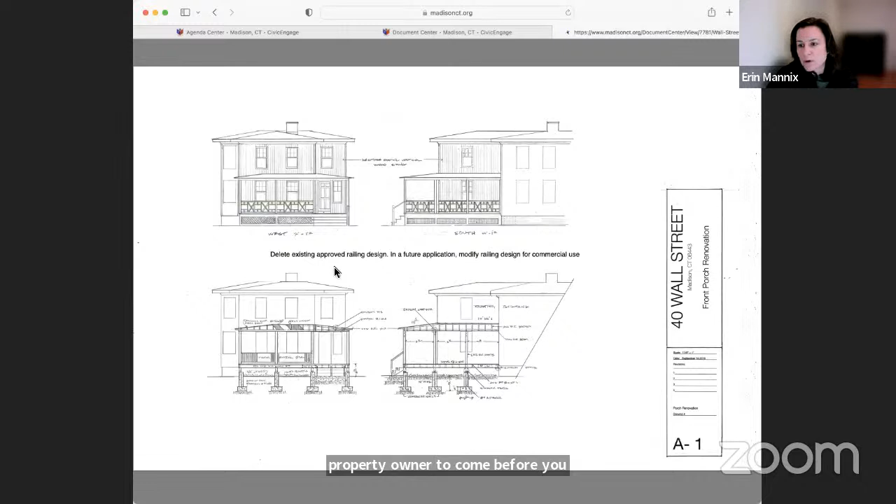This was the original design with the railings on the front building. What Bill is requesting now is to delete the existing approved railing design and allow the future property owner to come before you should any railings be required for a future commercial use. Bill doesn't want to construct the railings because the building's going to be sold, so he needs to get approval to negate our prior approval.

Code-wise, the drop from the porch to the ground has to be less than 30 inches, otherwise you have to have the railing. I can't tell from the drawing, but I don't want to fall two inches under 30 myself. I can't zoom in for some reason since I'm not on my work computer, but Bill says it's under 27 inches now. It shows two and change here.

So Matt, should you have no issues with that, again, as the administrator I can issue an administrative approval. It doesn't have to go before the Planning and Zoning Commission, but it does require that ACCA have some type of... I don't have any problem eliminating the railing.

I don't know how anybody else feels about it. I don't have a problem either, Matt. There's no historic significance or anything of that railing, right? It's just arbitrary. No, I think it looks nice, looks nice and clean the way it is, without any railing. I'm trying to think if someone else tore a railing down in the historic district, but I can't think who it might have been, Alex. Maybe a fence.

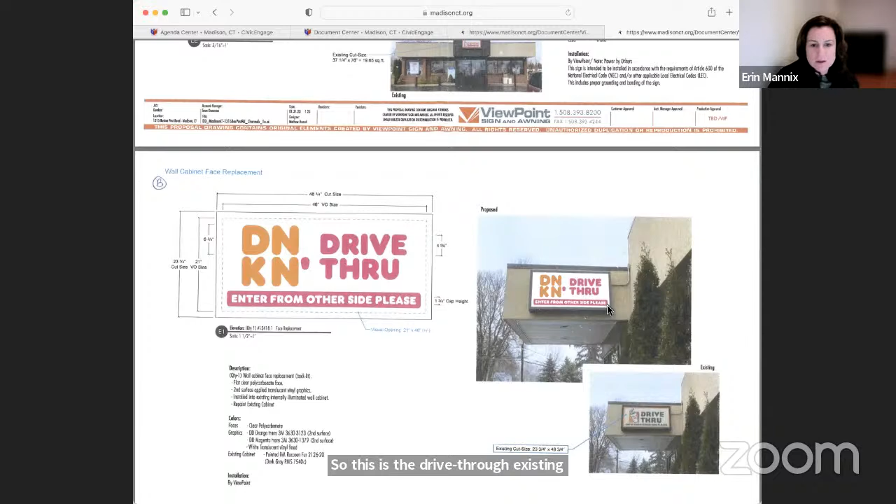So this is the drive-through existing sign, it's all within the same framing, it's just a new face essentially within the existing framing. Some of these are newer, these are paneled side areas. This is all new proposed signage, and some of these I have a sneaky suspicion are going to push you over the edge, Chris, and you may just have some paneling as opposed to additional signage here. This is again on the drive-through side.

And this is the ground sign that's existing, the monument sign. This is the existing, but it's all within the existing frame. What's proposed is again the same rebranding for directional signage on site.

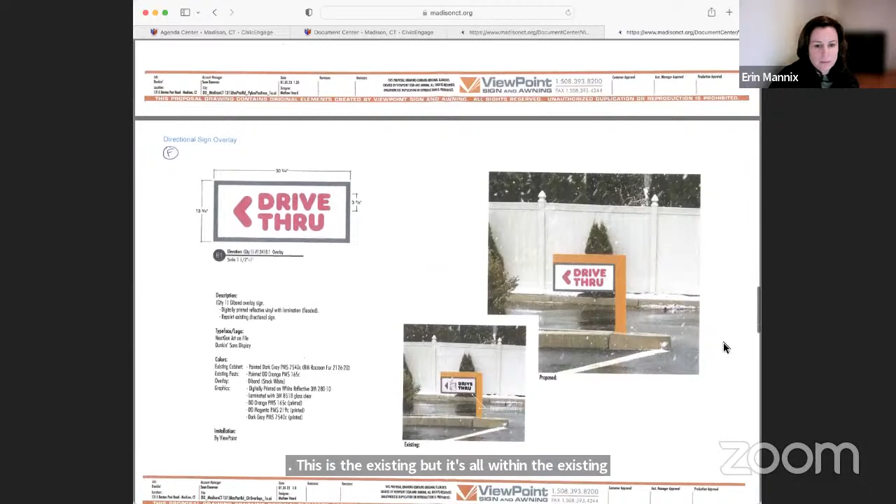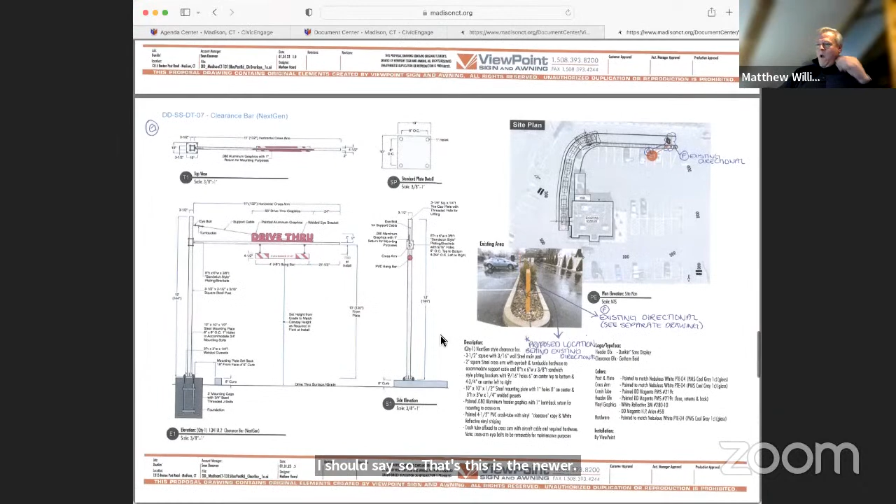At the entrance to the drive-through, there's also a replacement overhead signage as you approach the order window, or the order screen, I should say. So this is the newer one, it looks actually smaller than what was previously existing there.

The signage design is what the brand directs us to submit to you guys. I don't like to paint the brick gray personally, but again that's something they prefer, and it's the same with the panels on the side of the buildings. For me it makes no difference. If you guys want it or don't want it, it's something we have to submit. So I think the rest is all existing, it's just changing the faces to the new logo.

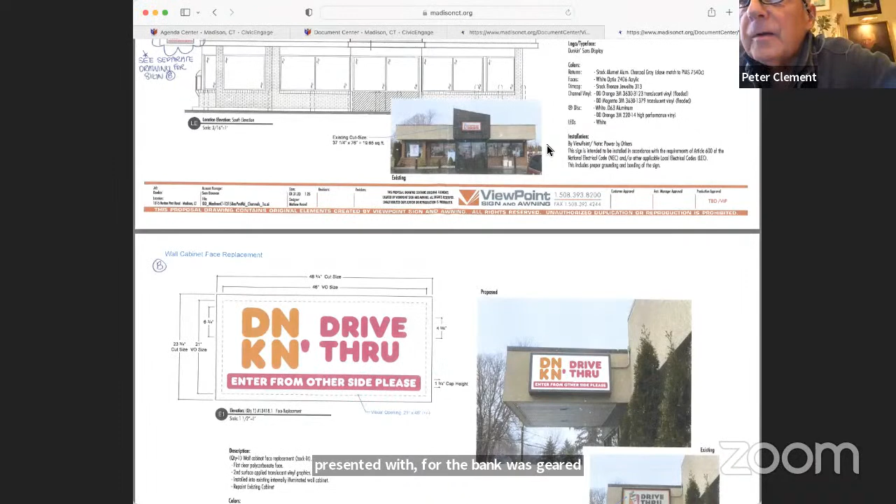Well, you have design standards in your village district, which you do not have in your commercial districts. Well, that doesn't mean we can't ask, it doesn't mean we're not looking to village-districtize this thing. I think we just want to be able to weigh in on what we think might be a little better one way or the other, that's all. I agree, that's why we're there, in front of us, I gotta presume.

I think the other thing that just kind of jumped out at me, if you look at the existing sign and the lower sign, the DNKN letters are really big. And even on the primary sign out at the road, they knocked out the little cup, good or bad. But if you scroll down and look at the existing and proposed sign at the street, that Dunkin' lettering is really large. I don't know how large it is, but maybe the other sign's too small right now, I really don't know.

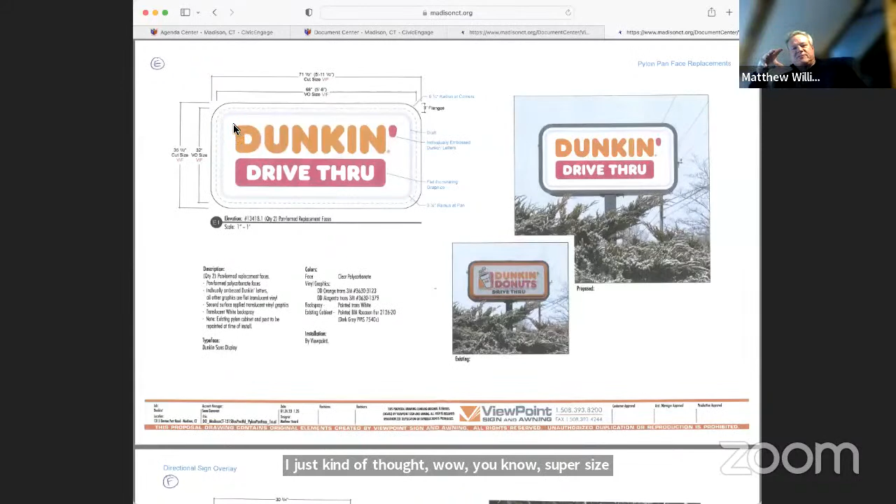I was going to ask how big those letters are. I just kind of thought, wow, supersize me on the lettering. You could adjust that, ask for a different gauge, I don't know how they measure that. They've eliminated some of the graphics, so now they're just filling the spot, and it's a big font. I don't know the size of the letter here. The overall sign is 32 inches. It's huge, the lettering is giant because they filled up the whole space and the whole thing with it.

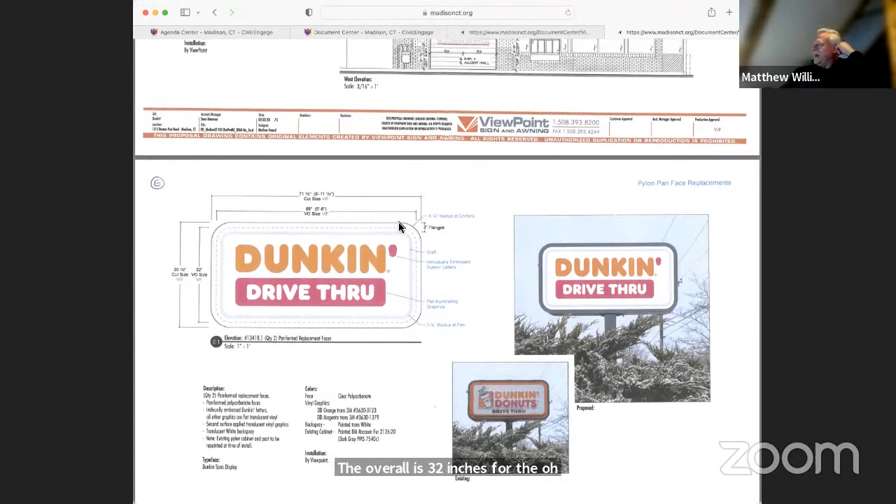The other one on the drive-through showed a 6-inch letter height, and that one really bothers me, 6 and 3-quarter inch. That one's way out of scale.

Why do they even have that sign? They don't want you to drive in there, why don't they just take it off? Can I ask, Aaron, is it an existing sign? Yeah, I know, but that doesn't mean it has to stay there.

Aaron, can I ask... my sign vendor is actually, his name is Sean Donovan. He said he's trying to get in. I see him. Here he comes.

He could tell us maybe what the letter height is, or the thickness on that fat ground sign. The fatness factor is what I'm interested in. It's a pudgy letter. Well, that's corporate, you can't change that. Their font is set. The only thing you can hope for is that they make it shrink the size. There's settings they can pick.

Hey guys, I'm Sean, the sign vendor. You guys hear me okay? Yes, thank you. Sean, what's the size of the letter on the ground sign?

I'm gonna guess, but it's probably 10 to 12 inches. That's big, because the visible opening of the VO is only 32 inches. There's the visible dimension of the sign, and then there's the thickness, or what I'd call the fatness, of the lettering. So if I could slim down the lettering, that would be great.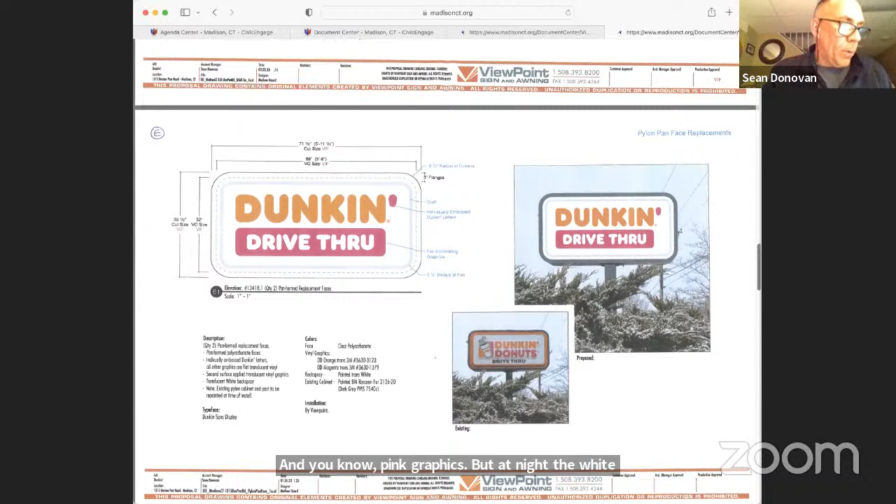So did you say it would be impossible to reinstate the orange border? Yeah, it's not the brand anymore—it's a new brand, it's been removed. They're pretty strict on that, it's the imaging. But if we opaque the white fields, I think you'd find that to be accommodating. Yeah, that would be better.

In signs C and D, which are the externally illuminated signs on either side, east and west, are we going to scrap those? I don't think they're necessary. If the walls are already built, there's an option where we can do a graphic—a cup and a donut—but they're considered icons or artwork. So if you didn't want to use copy, the walls don't go to waste.

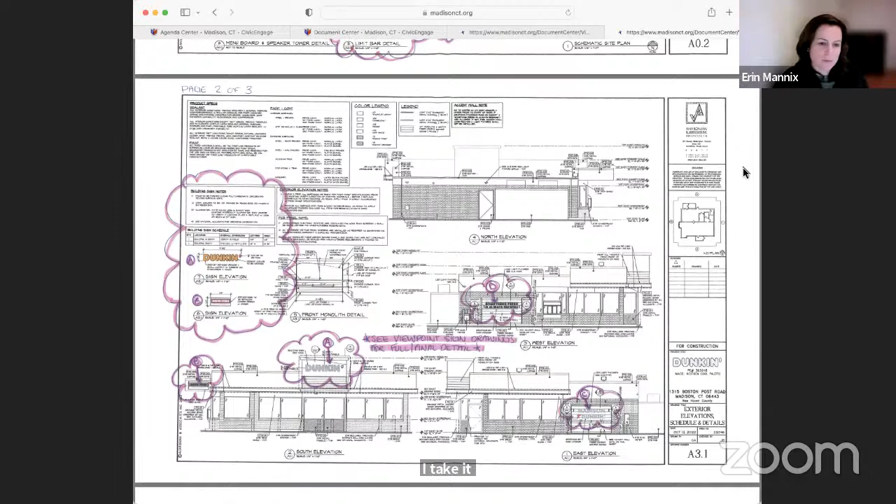That's usually a lot of these do go over the signage. I would anticipate that these signs on the east and west would have to be eliminated. Yeah, I would agree with that, actually. And that's not a problem - like Chris said, they usually put us over.

And then the other thing, I know you guys were talking about that wall sign for the drive-through wayfinding. We could just take the logo off that DNK and then just have the drive-through wayfinding sign that's telling people not to go down that driveway.

Yeah, that would be better. That we'd remove the DNK. Then there'd be a lot of white space in that sign, right? Well, we could - sorry for scrolling - we could upsize the drive-through, and then what we could do is we could do the drive-through as a pink block.

With knockout white letters. And the enter from the other side could be smaller, like gray copy or something like that. Can't that sign be smaller? Is that an existing framework for the sign? Can't it be smaller?

Well, it's an existing sign, so we're just refacing it. I mean, Chris, are you still on? Do you need that sign there? Is there a reason that's there, like to keep people from driving down that side? I think it's there because it's existing, it's always been, and it just tells the customers not to pull in on that side.

But now it's gotten very bright, I think. I was going to ask if the existing sign could remain. I mean, I just think I like the smaller black letter versus the orange - we could do pink letter. Anyway, well it is.

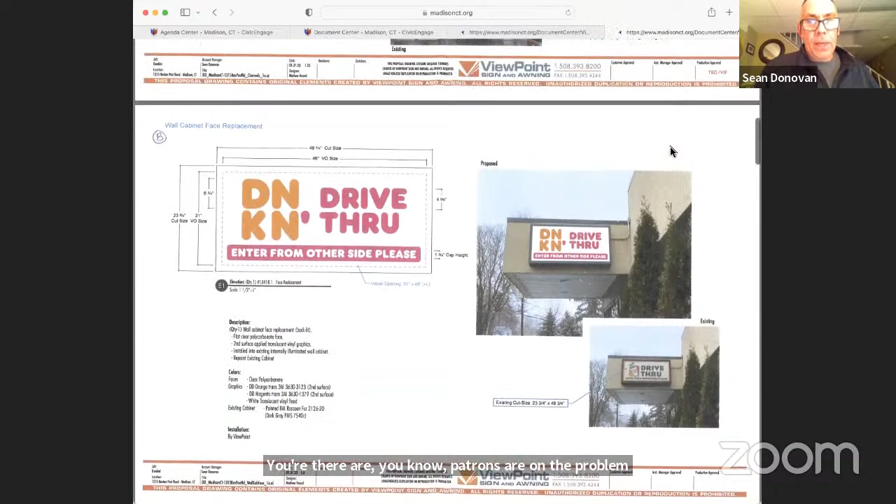If you looked at the pylon, see how you had the pink drive-through with the knockout white letters? We could do that for the drive-through. And then enter from the other side would be gray, dark gray letters. So it'd be smaller.

So we could fill that up - it'd be like drive-through, enter from the other side. It'd be a clear wayfinding message without a lot of branding. But the sign would remain the same. Yeah, I mean, it's an existing cabinet.

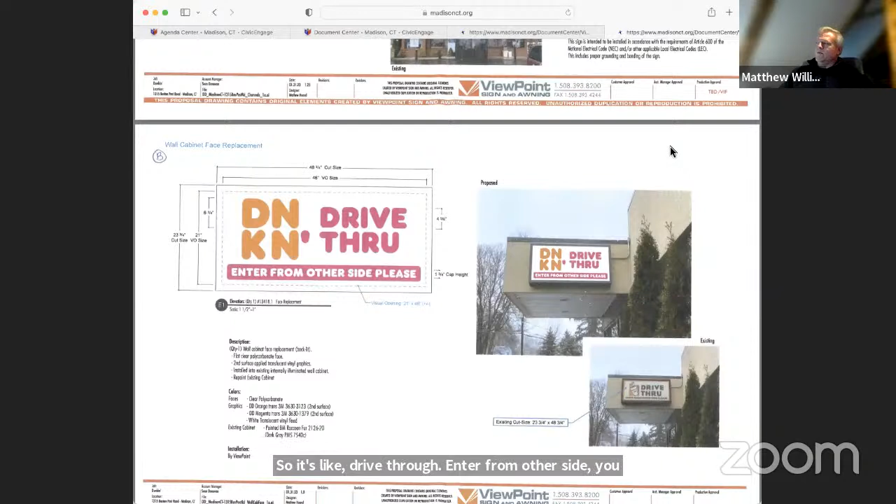So, if we - so I really don't understand your proposal. Well, to that point, it's an existing sign, it's not big. I'd like to see them come back with - they made this presentation - come back with more suitable signs or see what else is available from corporate and put it all together and let us look at it again.

That's my thought, I'm not comfortable with it as is. The lettering, well, I agree, Alex, and I think most of us do. Let's just go through the individual signs because there's a lot going on here. If we go through and come up with a sort of consensus guidance for them, that might be helpful.

Now I'm looking at the front of the building and they're taking the slope off the roof, which I think is fine. It looks to me like maybe they're thinking that looks a little bit like a coffee cup, which I don't mind, that sort of pop symbolism. But the Dunkin letter on that new sign is 20 inches high.

And it's a situation where they're filling that whole facade and making it a sign. I don't know if that's too much, I don't know what other people think of that.

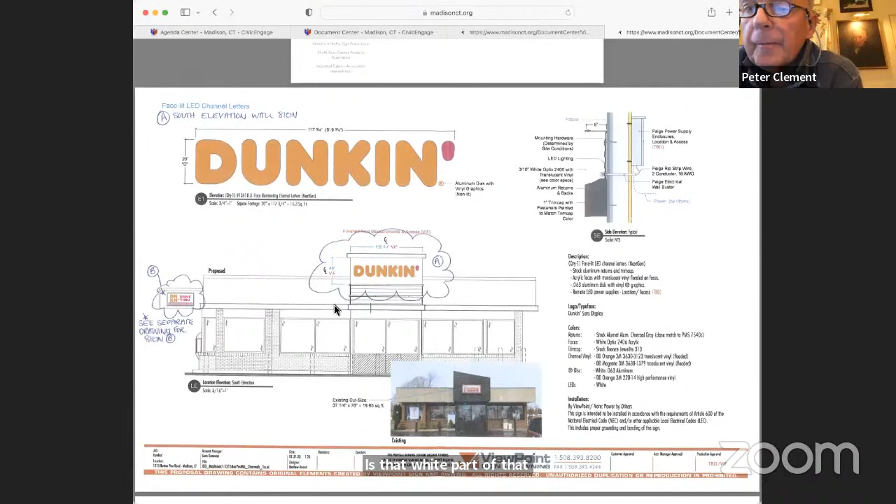Is the white part of that illuminated or is it being hit by lights from outside? That's fiber cement board. What do you have there - internally lit orange letters, individual orange channel letters, on a white fascia that they call the monolith.

And that's the old style, the pitched roof. But now all these monoliths are being converted, as you see, like the lower portions with wood trim, and then the white fascia is now the sign fascia. Those are individual illuminated channel letters.

And basically these may all have to be reduced based on overall sign square footage that is proposed. So the next step is, you've got these calculated, but it's based off your overall frontage, and you have to calculate all of the signs for your total square footage. So you may find that these signs shrink to accommodate what's allowed in square footage.

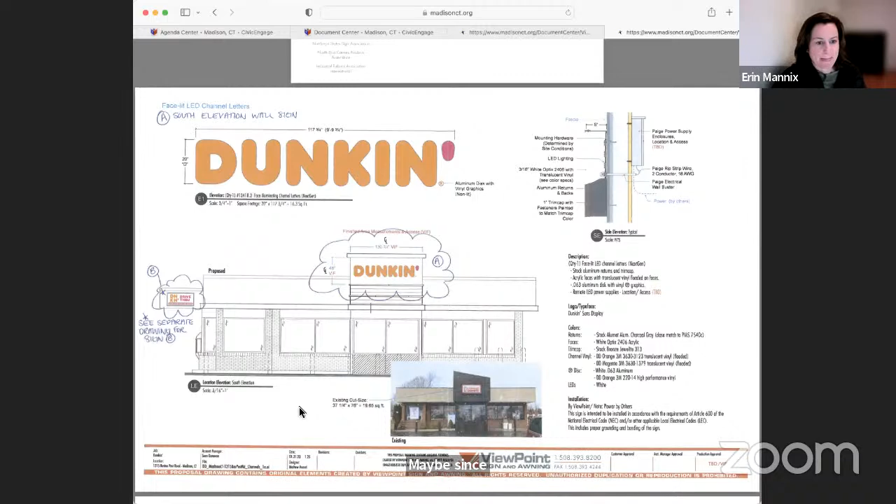Maybe since they're going to have to redo all that, maybe what we could do is give them some general thoughts, so if we can list those. My comment on this primary sign is that the letters, internally lit, are very large. I don't have a problem necessarily with whatever the wood material is.

I think it's that panel they're doing on the sides of the buildings, or want to do on the sides of the buildings - I don't know what material, and it's probably on here, the coping, the capping on that roof. I don't know if anybody knows what that is.

No, I wouldn't be able to comment on that. Maybe it's just an aluminum cap. What color, I guess, would be all we'd want to know - is it dark, the bronze color? I think the rendering you were looking at earlier might tell you.

Our drawings are focusing on the signs and not really showing that detail well. I'm looking at this on my larger screen in my office, so I can actually see that fairly well. These show as white, although the rest of the building is all gray. So it's probably a gray or a dark bronze, probably a charcoal gray - I think it's Benjamin Moore raccoon fur, a charcoal gray.

Behind the letters as well? No, that's white, this is white and this is white. Can you scroll it up? I can't see what you're pointing to, could you scroll it up just a bit? The people's pictures are blocking the lower level of drawings - I can get rid of the people. Okay, I'll duck down. How's that? Now you can see, the west side of the building is white.

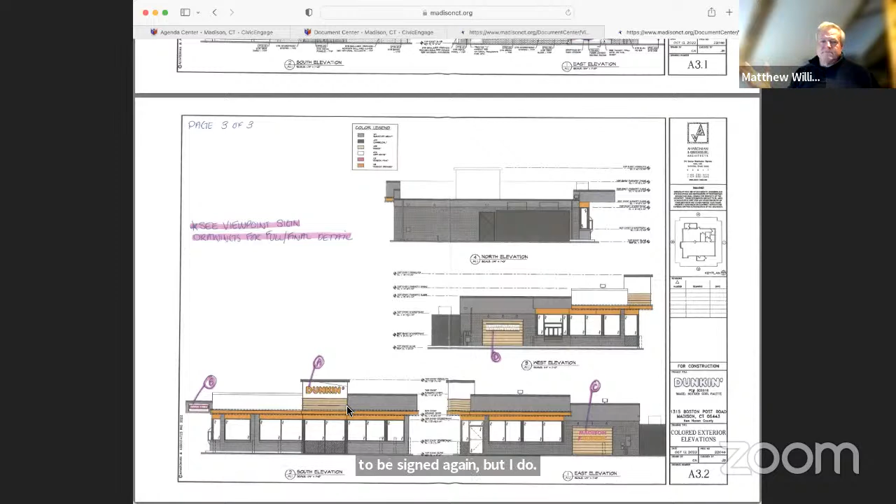My personal opinion, I don't know what anybody else thinks about that. The one that says Madison on it doesn't bother me as much. As you drive in from Clinton, it might be kind of nice to see Madison and people going to Hammonasset, but I think it's gratuitous. Well, the brand puts that on there.

It is supposed to be about the drive-through experience. Both those accent walls are already there when you're in the drive-through lane, approaching the window. So it's more about the experience. A lot of towns like it because it connects it to the community. The one they usually drop a lot is the 'something fresh' idea, or 'runs on Madison' or whatever.

So I have a question about the colors - I'm looking at the south elevation where it says Dunkin in the middle, gray on the right, on what would be the second floor of the roof. Why is the other side white? It's shown that way on the west architectural elevation too. Yeah, why is that white?

Some of the shops have that, just a design piece that they throw in. Because it doesn't look like a design, it looks like something left over. Well, I think that's the existing fascia - is that off-white? But that could presumably be painted.

Yeah, I also know that with the orange banding, I believe there's a brown option - some towns that don't like the bright orange go with that. I've seen those before. So could we leave a comment about the white being painted out?

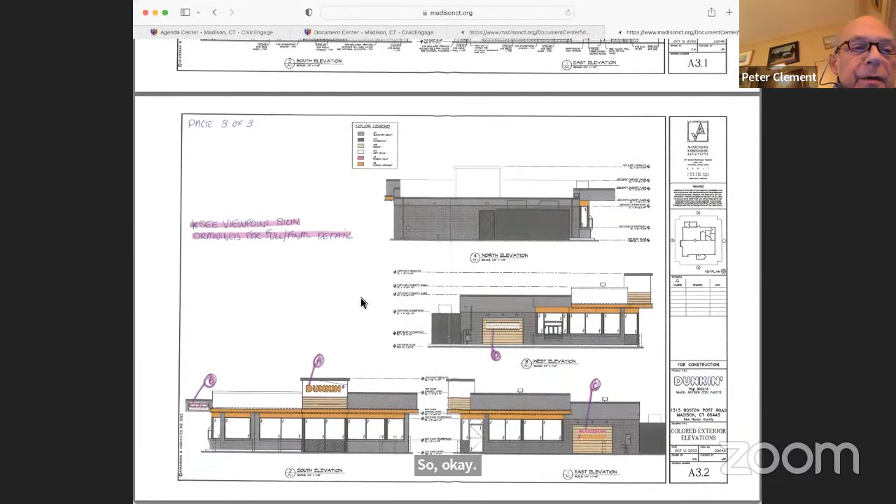So are we going to somehow record the suggestion that those white parapets can be grayed out? I have that as notes too. I'll summarize all of this and send an email to Chris and his team so they can come back to you for your next meeting with that.

The other smaller signs, I think you got all of them on the facade. The rest are smaller directional signs such as this one here. They're all under 2 square feet, so from our standpoint, with the markings on the pavement for directional traffic, I don't really see much of an issue with that.

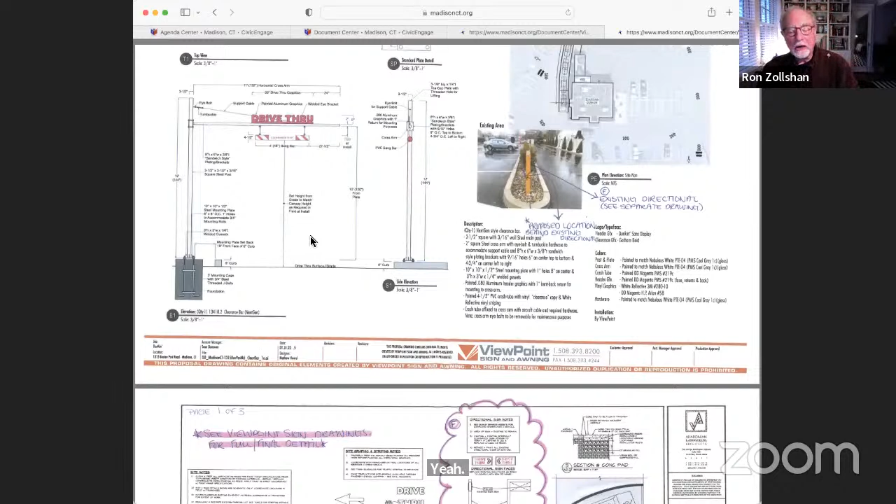Matt, would it be appropriate to tell these folks, given our points of view, and the fact that they're over in signage, to review their restrictions, determine what they're going to have to eliminate, and let them choose what to eliminate given our points of view? Yeah, I think they have, I agree Ron, and then come back to us so we can review the proposal once again. I agree.

And I think, because they may find when they calculate this out, one thing I see potentially happening is, even though I mentioned the 20-inch high Dunkin' letter on the primary sign in the center of the building, that might have to get smaller. Correct, and then there's going to need to be some design consideration of that. So they've got to go through and look at what's available to them size-wise, taking our objections into consideration, plus the fact that they have to recalculate.

Right, let them come back and give us a new proposal which they think we will accept. How is the allowable signage calculated, by the lineal footage, or do you guys have a different method? Yeah, I'll send you the link, Sean, so you'll have the calculations for it.

I think it's the gross area. When you have a free floating character like that sign would be, the primary sign, I think it's the area of the letters themselves. Am I right, Erin, when they're internally lit? Oh yes, I think... I thought you were asking how the total was, whether it was based on linear frontage.

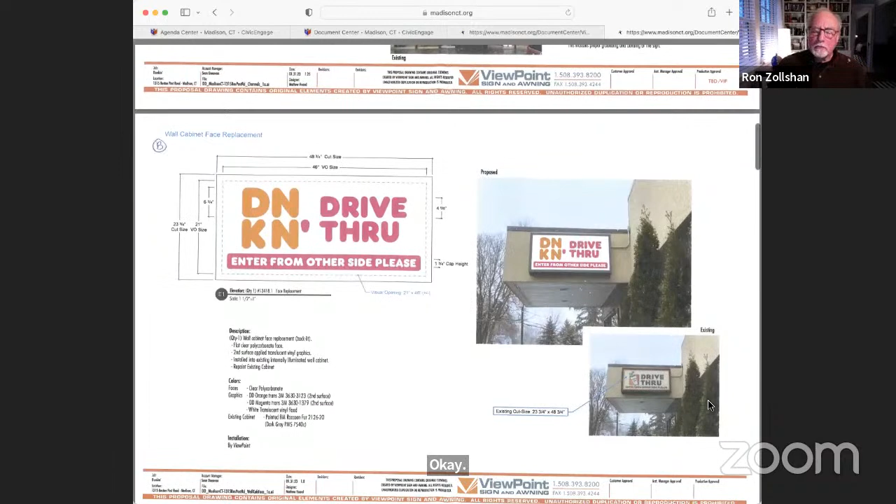So which windows are proposed to be covered with something? Around the corner, they're behind, on the west side, behind these shrubs. So if you see here, new windows, over on that side there. Oh I see, okay. But that's just a chainsaw away, I mean, just remove the landscaping, those trees, they're not permanent trees necessarily.

But landscaping is part of a site plan for a commercial property, so Chris is aware, as this has served as a learning experience, that modifications to both the facade and site improvements are subject to review and approval by this committee and the commission.

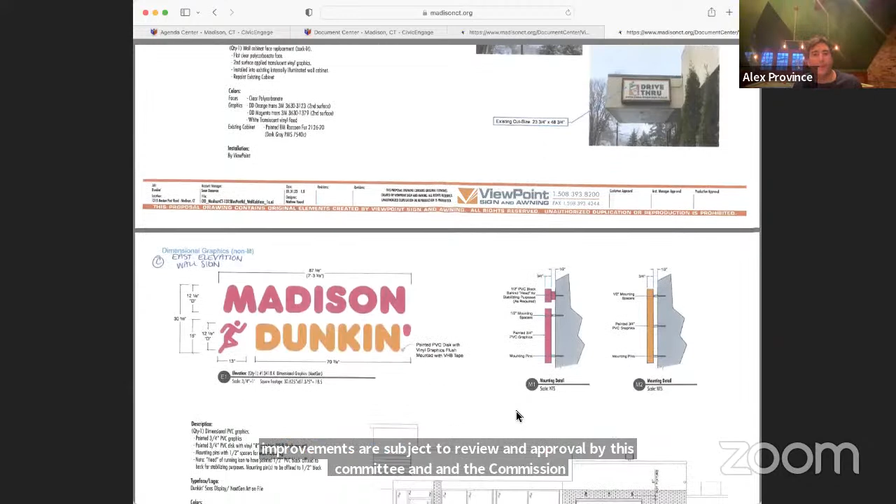And there were also mentions of LED lights above on the east and west side where those wood panels are going to go, but temperatures aren't given that I could find. Well, maybe there's a reason, if there's no signage permitted here, there would be no lighting illuminating those panels, so the lighting would be removed if there was just a panel without a sign. Yes, there's no lighting existing. Okay.

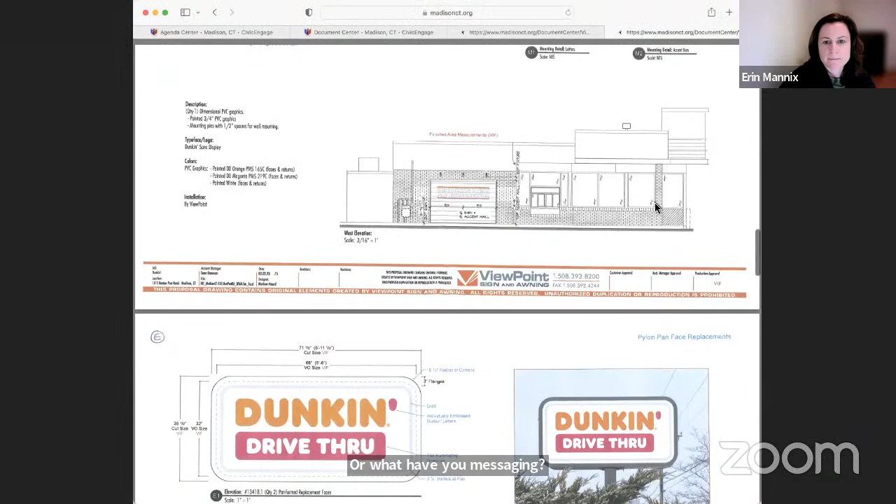So there's a glazed storefront behind those arborvitae that are standing right up against the building, and that's what they're proposing to cover with some kind of vinyl or messaging. Here's that elevation, Matt. It could be the kind of perforated vinyl you see on buses - you can see out but you can't see in. Looking at that, we would likely consider that signage as well.

I don't see the need to put anything on those windows. Personally, I think you could leave the trees unless they're causing some sort of problem, or let people look into the building.

I don't know what anybody else thinks of that. Matt, I'll make a motion to remove the arborvitae. I think the light in the building would be much more important than looking at an arborvitae that's not going to grow well in that situation.

Chris, I just wanted to chime in - is that going to be a service area behind those windows? Yeah, that's why I mentioned there's a bunch of machines there. So that's the reason for the screening. It's a work area, and it's also unsightly. I also believe the decals are like coffee beans.

I don't believe it's like Dunkin' lettering per se. Can we just tint the glass? I was going to say, tint the glass, put some shades, some contemporary looking shades - rather tint the glass than put any kind of image on there. You could also just tint from the windowsill up 1.5 feet to cover the backs of those machines, and then you could still see into the store. Good point, Peter - you could do all kinds of things.

And John, those plants that are there, the arborvitae or whatever they are, those are really dating the building as well. They're the wrong plant for the wrong area, Alex. I think if there was any plant material around the building, it should be very low - let the building come out of a low green area. Those plants are not helping the building out at all.